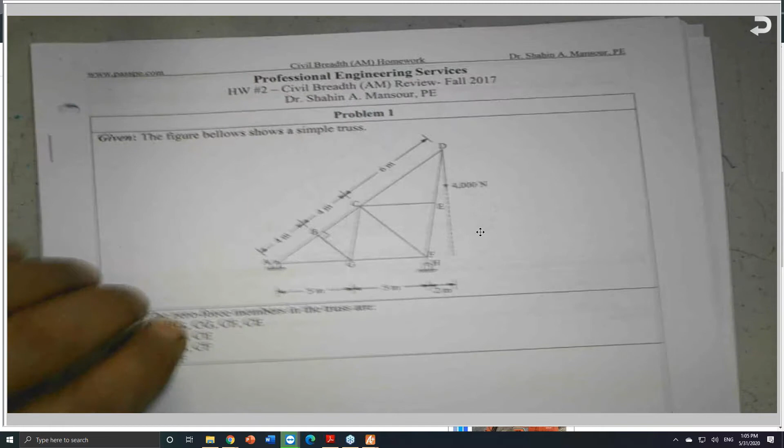So today I updated the schedule, because I found that the schedule available on our website is correct, except there is one day where I found a conflict. As I said, except yesterday - 5:30, I was supposed to be here yesterday between 4:30 and 7:30.

Please do your best to attend the sessions, and I will make it up. I remember I missed one session here, so I will make it up, and after that we'll go to transportation and construction until I resume the classes.

7-11. 7-11 is very important. By the way, this term 7-11 - like 7-11 stores and 7-11 in transportation - we have the phases, the sum of the phases is 7-11, and also chapter 7, table 11. This is in my Civil Breadth AM book.

It does have a very important table, which is chapter 7. Chapter 7, table 11. Here is chapter 6, chapter 7, materials, and there is a specific table here. By chance it came to be 711, so it's not intentionally designed to be that, but it came to be 711.

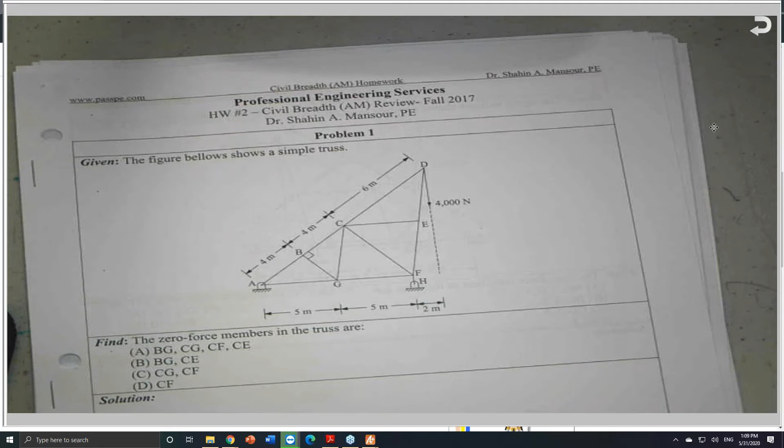So this is why I was not able to teach the whole day yesterday. I was teaching the surveying class for California, and I felt that the headache would not help me do a good job with you guys, so I moved it from yesterday to today. Thank you very much for coming, and thanks to all of you who emailed yesterday asking about my headache. The headache is gone, and I will do my best.

I will resume. Okay, I know there are many exams I sent before, and you are expecting some solutions from me. I will work on that and keep working on that, and do your best. Okay, so I sent the three exams this morning.

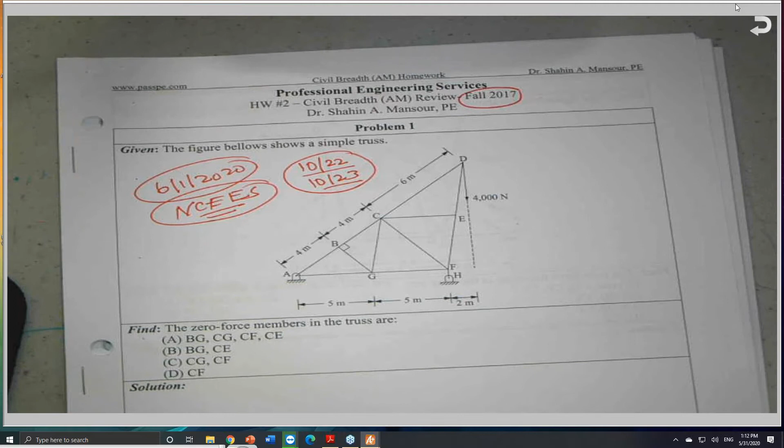So try to do your best and stay safe as much as you can, and I will do all my best to help you prepare for the October exam. I hope the October exam will be the last exam you will take.

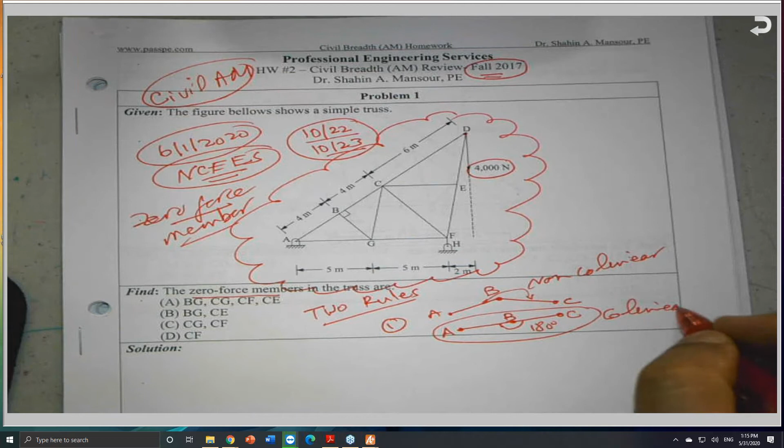Non-collinear means they have an angle—they don't have the same bearing or line of action. For example, if you look at these 2 members A, B, C, this angle is 180 degrees, so we call them collinear members. The rule says that if you have 2 non-collinear members and there is no support or load at the joint, these 2 members will be zero force members. This is rule number 1, as you recall.

Rule number 2 deals with 3 members, like AB, BC, and BD—3 members forming a joint, meeting at that joint, and 2 of them must be collinear.

Okay, and there is no load or support here. There is no load or any support like this or this. So this member must be 0. The third member must be 0. So these are the 2 real rules that we normally state in structural analysis.

Any structural analysis book you have, you will find these 2 rules. Some books say there are 3, but they came from here. So even some books I saw put it as 4 rules. But these are the 2 rules that if you remember them, you will be able to recognize that.

So if you look at this here, it is AB or BA and BG and BC. These are 3 members. This member and this member and this member, they are forming a joint. Here they make it 90 degrees. Here, not necessarily to be 90 degrees.

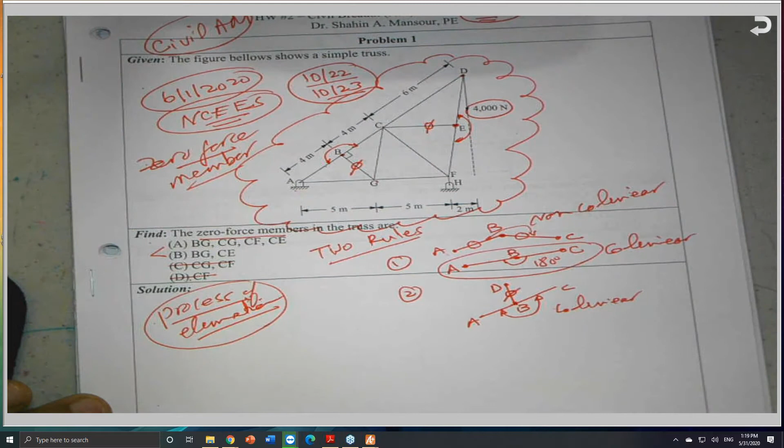is 0 also. Here you will find that CE is here and CE is here. So I'm still not okay. So probably this is not a good choice to start with E.

Right now, normally, okay, you are saying that this is BG and CE. So I will pick a member that is not here. And this is another way the process of elimination could be helped, since I eliminated 2 answers, and I said that CE is here and BG is here.

I look to CG or CF. Both are ones where you can make a determination of either A or B. So I will go to CG, and this is why I was very close to go to CG, but I jumped here just to tell you that moving here is not a good strategy. The good strategy is to identify a member that is not in the answer, so at least I can make the choice and go home happy.

So CG, since this member is a 0 force member, you can look at it more than one way. You can look at this joint G in more than one way. This member, if you take this joint, these 2 members, by the way, they are collinear. They are collinear.

This member is 0, meaning that as if it does not exist. I can look at this joint as 2 members are collinear, which is GF and GA, and this is the 3rd member, CG, forming the joint. So this is a 0. You can look at it that way.

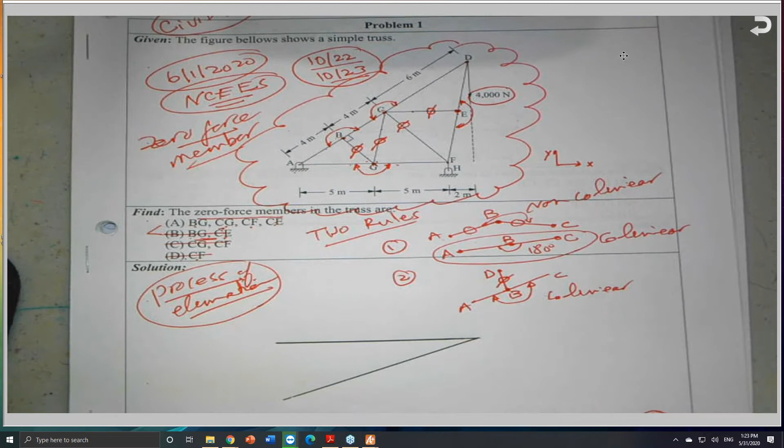Truss structures have certain assumptions, and we apply loads only at the joints, like this truss here, which I probably used before, to illustrate the concept of the zero force member. So if this is A, joint B, C, D, and E, let us assume for the sake of discussion we have one force here.

P is equal to 8 kips. Let us assume that this is 6 feet and this is 4 feet. And this is here. Let's assume this is also 4 feet.

Don't forget that all truss problems given to you should follow this rule: 2J equals M plus R. This is for statically determinate trusses, where J is the number of joints, for example 1, 2, 3, 4, 5. So 2J, 2 times 5, is equal to the number of members, 1, 2, 3, 4, 5, 6, 7.

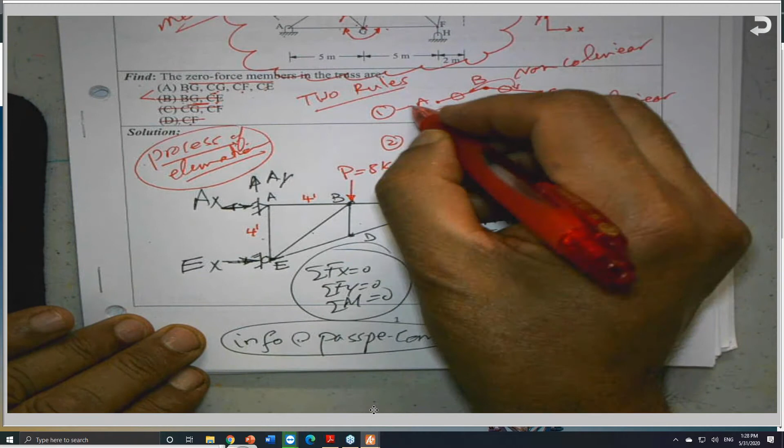The rule number 1, some of you are asking about rule number 1. Let me explain rule number 1, this is written in my book in chapter 4, the structural analysis book. It has these 2 rules, like any structural analysis textbook, the one I use for teaching for almost 30-something years. Chapter 4, structural mechanics, which is based on the NCEES to the best of my knowledge, has 2 rules for trusses. Here they are, or I call them 2 cases, by the way. I don't call them rules.

Let me get my camera as close as I can, at least so you can read, and let me adjust the focus. Here it is, let me read. I explain them using my Egyptian English. Okay, right now let us read the 2 cases or the 2 rules using American English.

If 2 non-collinear - and I apologize, collinear is double L, this is why I said this is missing an L, forgive me for spelling - if 2 non-collinear members form a truss joint and no external load or support reaction is applied to the joint, the members must be zero force members. This is the rule you will see in structural analysis books.

If we apply this rule right now to the truss I just drew, here it is. I just made one truss, A, B, C, D, E, and it has only 1 load. So this is the truss I just drew, here it is.

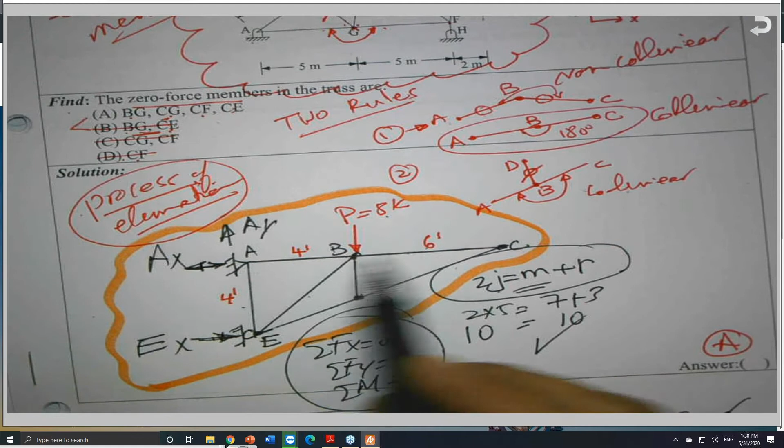Let me give you 22 seconds, because I think now you can tell me how many zero force members are in this truss, A, B, C, D, E, as you see it here, and it has only 1 load here, 8 kips. And this is 6 feet, this is 4 feet, and this is 4 feet. I will put 4 answers: A, none; answer B, and we can vote.

We are a democratic country, we're going to vote this November. Okay, it is 2 members for answer B. Answer C, 3 members. Answer D, 4 members. So either none, 2, 3, or 4. These are the 4 answers that I have.

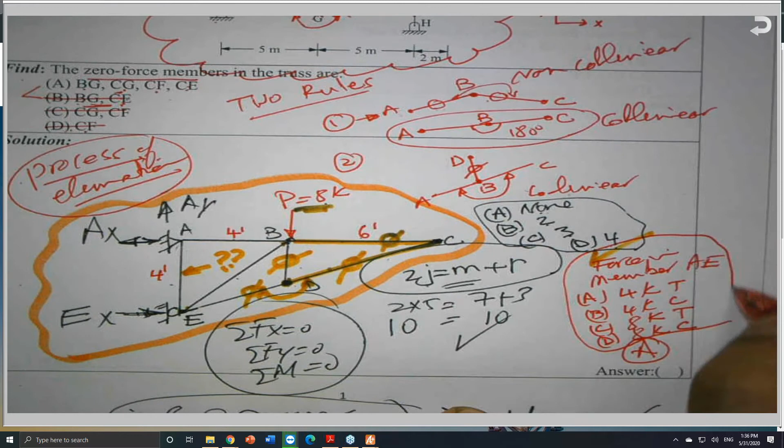So we have answer A and B and C and D. The answer A, 4 kips tension, 4 kips compression, 8 kips tension, and 8 kips compression. Okay, I'm talking about the member AE. Here it is, AE.

So this here, the answer is 4. Let me mark the number of zero force members. This is the number of zero force members.

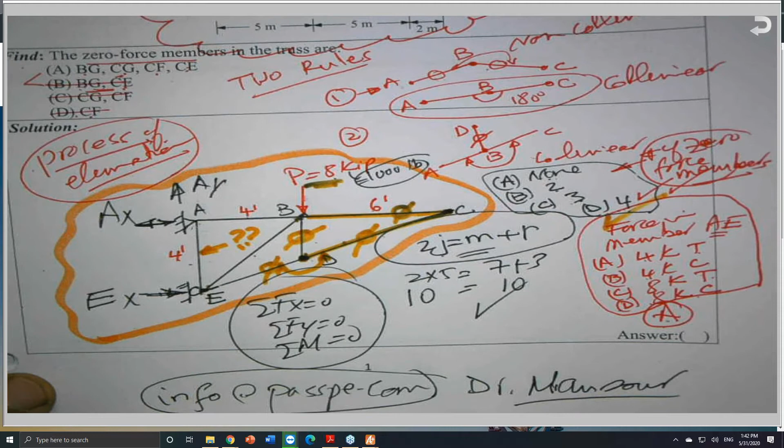Let us look at this - we have a force here. I will answer you, my friend, just give me a chance. Some of you raised a hand, but let me go to my drawing board and try to explain it a little bit more.

Because I needed to understand this very well. So this is the truss I just constructed - I don't make anything, I just construct something and make it a little bit to proportion, so at least you get a feeling of it.

So this is a roller support, and this is a hinge, as I draw it here. Be careful with the supports, because supports are very important. This is a roller support - it has only one reaction, perpendicular to the contact surface between the support and the surface. And I said that there is only one load acting here, which is called P, 8 kips. We named the joints A, B as in boy, C, D, and E. Is this correct? Yes. And this is 4 feet.

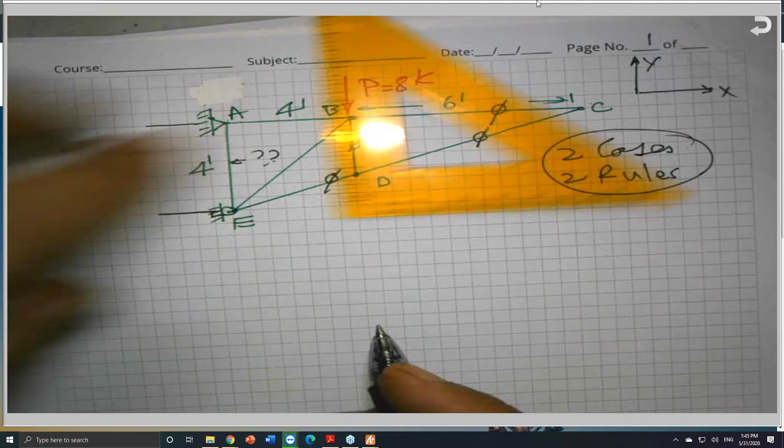So A sub Y, I put it to be up, or if you'd like to put it exactly here, I have no problem with that. Let me modify my location of this reaction, just at least it will make more sense to you. So if you put this here as an A sub Y, and as you can see here, I draw it up.

Why? Because we have 3 equations, the 3 equilibrium equations. Sigma force X equals 0, sigma force Y equals 0, and sigma moment equals 0. So I have one force, 8 kips coming down. I must have this 8 kips going up. Equilibrium. Otherwise, this truss will start to move around.

Have you ever seen a truss on the street? No. Trusses always are stable and in equilibrium, because action and reaction. So I know this from here by inspection, by applying the sigma force Y.

I have here 2 reactions in the X direction. One reaction is going to be this way, and the other reaction going to be this way. And these two reactions are equal magnitude, opposite direction. Because this force is pushing down, it tries to take this truss out. It will create a clockwise overturning moment. How much is this reaction, by the way?

A sub x. Can you tell me what is A sub x in 22 seconds, please? In fact, you will find that A sub x is also 8 kips.

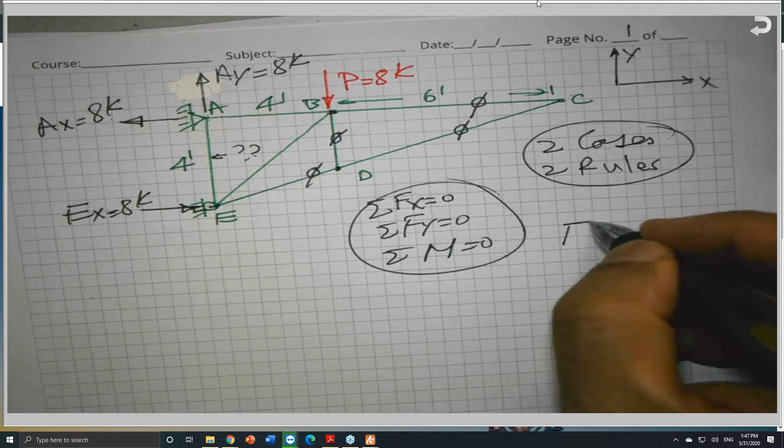So if the force right now in the member AE equals what? This is what I'm asking. This force in this member here, AE, how much? This force, by inspection, you don't need to do any analysis. But I will take the method of joints and apply this force here. It must be this way. The arrow going this way, and the arrow is going this way. And this force here, the force in the member AE, is equal 8 kips.

Tension or compression? So we have 3 scenarios for any force that exists on any truss member. Either a zero force member, and we show the member with 0 like this, or a member under tension, or a member under compression.

For tension and compression, there are 2 definitions. I prefer to stick with one. I can explain both of them, but I needed to remember only one. I prefer always with respect to joint. This is a joint, and this is a joint, and this is a joint. Any truss member is connecting 2 joints, or spans between 2 joints. You will never find a member just at a joint and hanging somewhere here. No, it has to continue all the way to the other end to form a joint, because these are the assumptions. All members are connected together with frictionless joints.

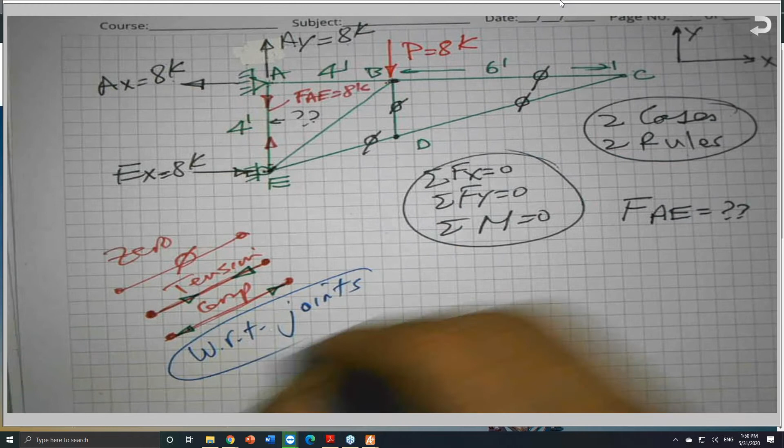If you like to remember the other, this is with respect to joints, and it is true with respect to members. But if you remember with respect to joints and apply it, if the force is pulling the joint, here is a joint and here is a joint. In our case, what is the arrow here? The arrow is pulling this joint A here. So the force in this member is 8 kips tension.

And this was the answer C. Not 4 kips compression. No, 8 kips tension. So this answer is the correct answer.

Okay. Similarly, what about the force in the member AB? I determined the direction of this. So I have a force going this way and a force going this way. So the force in this member also is 8 kips, and also it is a tension member.

The force in the member EB, the force in the member EB, I will wait for you. I need somebody to give me an answer.

So already you found the forces in this member and this member and this member, which is 0, and this, by inspection.

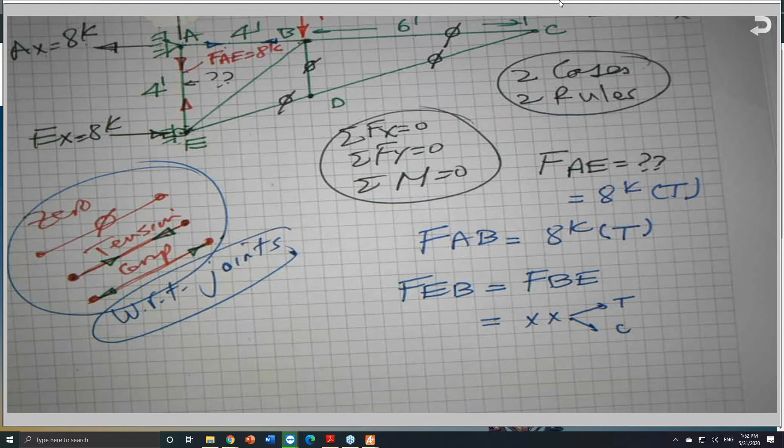Let me move my camera here, at least you can see the entire truss. I will give you 1 minute from now. I know you have 6 minutes on the exam, but we need to be ready and fast, because we need to get 100% of the exam to guarantee that we will pass.

So this is the second member I am shooting for. Okay, the 1 minute is over. So let me check to see if anybody of you can help me.

Okay, I got too many answers, too many different answers. Two of them so far are good or correct.

Okay, first of all, by inspection, I know this member is 0. The vertical member BD is 0. We got it from here.

So this member, the slanted member, it must have a component in the X direction and a component in the Y direction. So the component in the Y direction, it must balance this 8 kips.

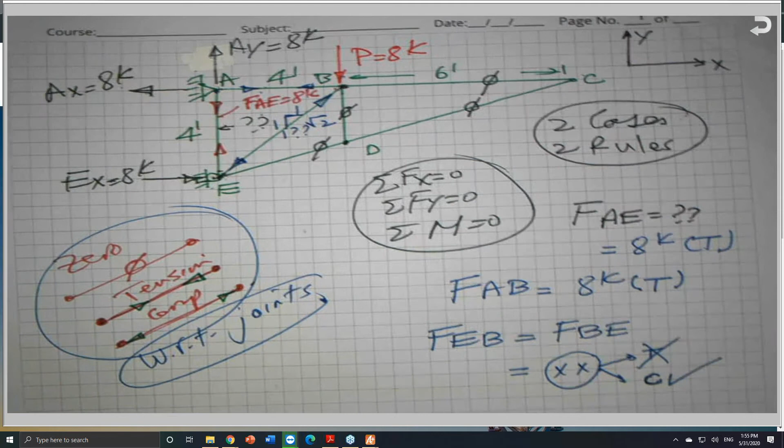So if I take this joint out, let me take a joint, because there are 2 methods, or you can make it 3. Method of analysis for trusses, method of analysis. Methods of analysis, essentially there are 2. Some books put it in 3.

Since I use many structure analysis books for my 30 years teaching as a professor here in CSU Fresno and in New Mexico State, in Las Cruces, New Mexico, each author or each professor presents the case, but some professors make a little bit of difference.

So method of joints and method of sections. And there is another method that came from them, it's called cut and sum method. But essentially it is a method of sections.

Method of joints, I need to remember: never pick a joint that has more than 2 unknowns, not 2 members, be careful. 2 unknowns.

Why am I saying that? I'm not inventing anything, by the way. All this knowledge is available in textbooks, I'm just presenting it now. Why I'm saying never pick a joint that has more than two unknowns, not two members, is because I have only two available equations: sigma force x equals 0 and sigma force y equals 0 for method of joints.

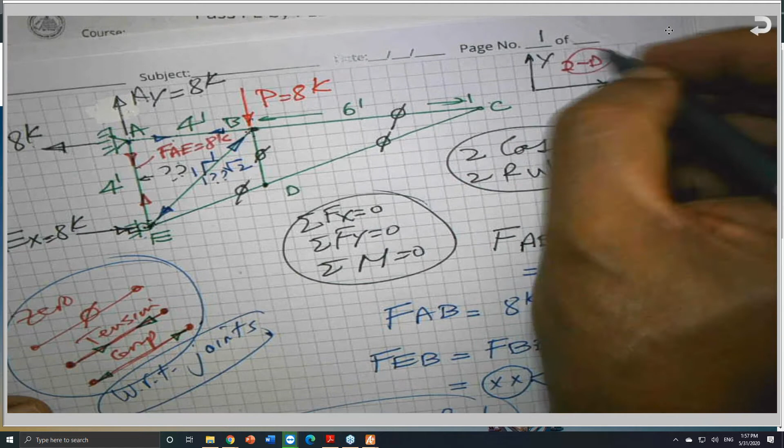What about the third one? Oh, I mentioned there are three equilibrium equations for a 2D system. This is a 2D system, by the way. Any 2D system that exists on Earth does have these three equations plus any conditional equations if there are any.

Because in method of joints, all the members are concurrent force members, they are meeting at a common point, so the moment equation has no value because there is no moment arm. But in method of sections, we have three equations: sigma force x equals 0, sigma force y equals 0, and sigma moment equals 0.

The moment equation does exist for the method of sections, and I will talk about method of sections shortly. The cut and sum method is exactly the same as the method of sections. You cut and sum the forces in the x direction, y direction, and even apply the moment.

So if you look to this joint B, if you take this joint out, what is the method of joint? Come here, Mr. Mansour, and you are going to cut this joint with a scissor. You take it out.

Isolate this joint. But am I violating the rule I just mentioned, never pick a joint that has more than two unknowns? No, I did not violate that because this is 0 and this is 0. Even before finding the force in member BA, I can still take the joint because already I have two members that are zeros, so I have only two unknowns. So if I take this joint out, I will take joint B.

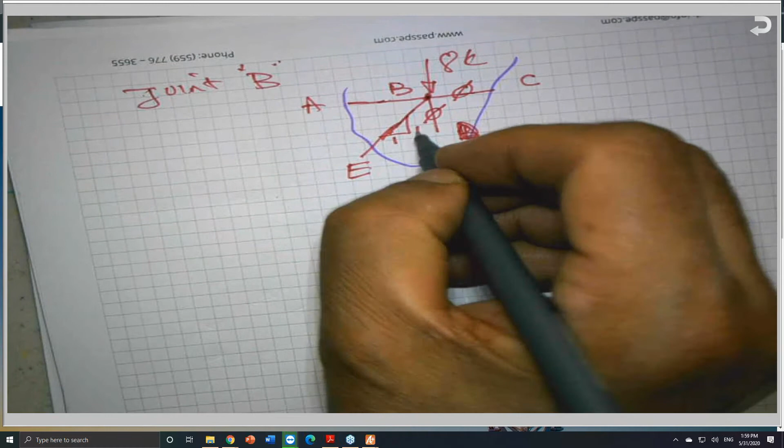Already I know that this is 0 and this is 0. And I know the slope of this is 1, 1, square root of 2. And I know for a fact this force must be going into the joint because the component in the y direction must balance the 8 kips, x and y. So in this case I can apply... Did I forget anything? When you pick a joint, you come with a cut, you cut the joint, imagine you come with a scissor and cut it and take it out as a free body diagram.

Right now, without knowing the force in member BA, which I already know from the other joint, I can say sum of forces in the y direction equals 0. And I have to state direction. I know the direction of the force, but assume for the sake of discussion I don't know if it's tension or compression.

Let me reverse it. By inspection, I know it's a compression force, but let me assume I don't know. When you have too many members, sometimes we don't know. Let's assume I assumed it to be this way. What is this? This is tension. I assume it to be tension. It is pulling the joint, pulling. This is the tension member.

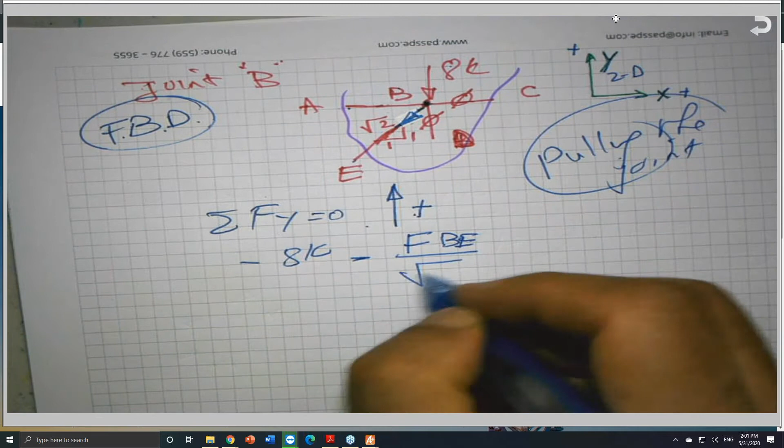So I will say minus 8 kips coming down, because I assumed anything goes up. And this here has a component in the y-axis: set minus the force in BE divided by the hypotenuse, which is the square root of 2, multiplied by the vertical component 1, equals 0. I will solve for the force in member BE. You will find that this equals minus 8 kips times the square root of 2.

And this will give me the answer that was given by one of you. So 2 square root and 8 times, it is 11.31, negative 11.31 kips. What does this negative mean? Negative means that my assumption is wrong. Okay, this is a very easy one.

I can, by inspection, say that this should be compression. So if I put it in the proper direction, which is a compression force, and if I apply this equation, the component is going up in the same direction, so this becomes positive, and automatically it becomes positive. That means my assumption is correct.

But as I told you, if you don't know the direction, either for a reaction or for a force in a member, assume it to be tension or compression, or assume it to be right or left. For example, here, these two reactions, I know that by sum of moments here, so this is clockwise, this must be counterclockwise. By inspection or by practicing, you will be able to find all these things.

A problem like this, problem number 11, of the same exam. A 1/2 inch 7-wire pre-stressing strand is to be stressed in the pre-tensioning bed, showing 14 tons jacking force. The length is given to be 310, and it's asking for the strand properties indicated. What is the elongation?

As you know, concrete, which I will also talk about, how to mix concrete and adjust for mixing properties of concrete - all these things are very important. This is the material section. Concrete will have different ways to classify it. Concrete is a mixture of 4 components. First of all, fine aggregate, which is sand.

Any concrete that exists on earth has these 4 basic ingredients, and after that it has some additional ones. Coarse aggregate, which is gravel, plus cement - and we have 5 types of cement, you should know what type. And finally, water. Those are the 4 basic ingredients for any concrete on earth.

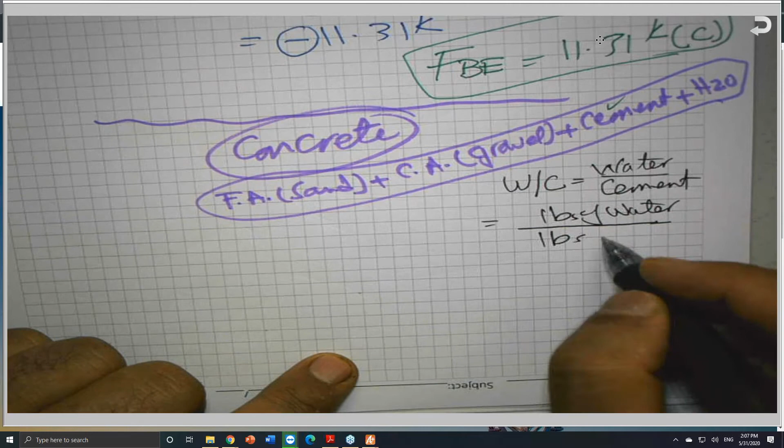What does it mean? It means how many pounds of water over how many pounds of cement. Or sometimes we express the water cement ratio by how many gallons of water per sack of cement.

We know a sack of cement is 94 pounds. It's not 100 pounds - they made it 94 because this is the volume of 1 cubic foot. So a sack of cement is 94 pounds. And a gallon of water is 8.34 pounds.

So this, and I have many problems related to this topic, because it sometimes comes in the morning, sometimes in the afternoon exam, especially for the construction group, or transportation also. And we should know how to adjust for surface water and so on. We'll talk about this later on.

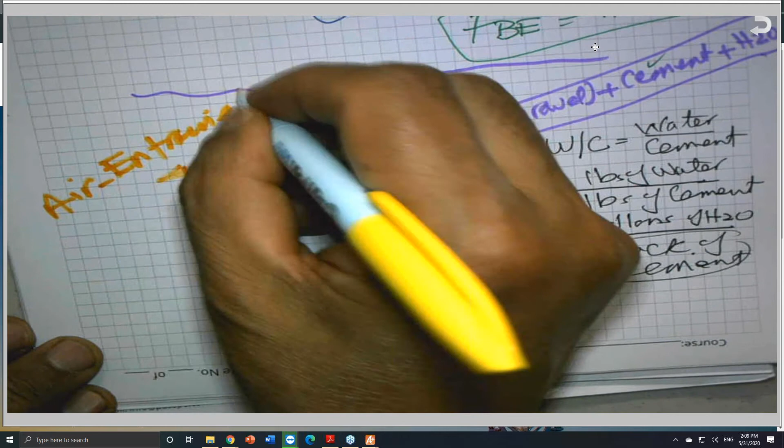So for concrete, we can classify concrete in more than one way. We can say this material could be either air entrained concrete or non-air entrained.

This air entrained concrete is the type of concrete where we intentionally create air bubbles into it using something called admixtures - I will talk about it later on. But non-air entrained concrete has some air called entrapped air, not entrained.

And there is a very important relationship. Any civil engineer, even while he is dying, should remember that. Forgive me for saying that, but if any civil engineer is asked about this, and even while dying he didn't answer, don't put him in the grave - just take him back, I'll tell him to wake up. Okay, no problem, I know you remember it.

But this curve or relationship is between the water cement ratio and strength - I'm talking about the compressive strength. So this is the water cement ratio, and this is F sub C prime, which is P over A, the 28-day compressive strength. I will talk about why 28 days later on.

So there are two graphs or two curves, one for air entrained and one for non-air entrained. Here is one, and here is another one.

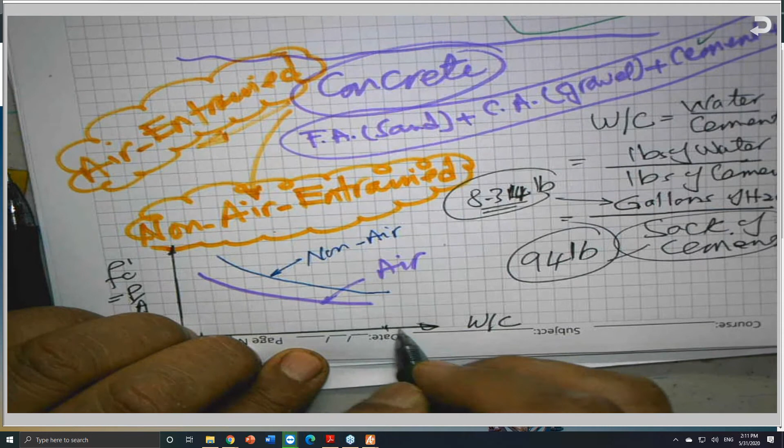For any given water cement ratio, the water cement ratio can go as low as 0.23 or 0.24, and it goes as high as 0.7. As the water cement ratio increases, what does it mean? It means the amount of water is more compared to a lower water cement ratio. You are putting a lot of water, so the higher the water cement ratio, the lower the strength.

So for any given water cement ratio, if you go up vertically like this, say 0.4 or 0.5, whatever the ratio is, if you draw a vertical line, you will find for the non-air case the strength is higher compared to air. So if you compare these two values, the strength here, this will intercept here and this will intercept here. So non-air will give you a higher strength because the strength is increasing this way.

So we are adding air intentionally for the air entrained concrete to increase what is known as durability, and we'll see what durability is later on. So we are creating air bubbles intentionally into the mix. We call it air entrained concrete. I know I'm losing strength for any given water cement ratio. These small microscopic air bubbles are between 0.1 and 1 millimeter. I am losing strength, but I'm gaining something called durability.

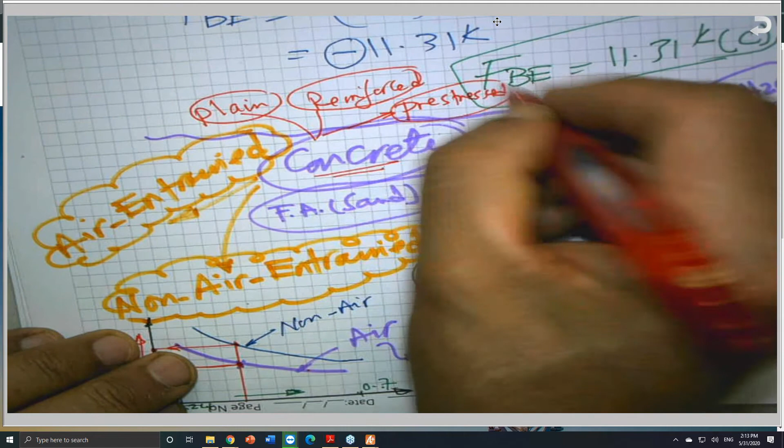There is another way to classify concrete. It could be either plain concrete, which is unreinforced, or it could be reinforced, or it could be pre-stressed. This is another way to classify concrete. It could be either plain concrete without any reinforcement, or it could be reinforced with rebars, like this rebar here.

Different sizes of bars, reinforcing rebars, this number 11 for example. And the other one is pre-stressed. A pre-stressed, we are using this. Probably some of you dealt with this. It's called pre-stressed cables, or strands, 7 wires wrapped together like this, and we pull them. I'm going to talk about what's called the pre-stressed strands or tendons. So this is another way to classify concrete.

Concrete also could be classified as normal weight concrete or lightweight. So normal weight and lightweight. Each group can be taken separately, and we can talk about it, and this probably will be covered during more discussion, but let me talk about pre-stressing, which is related to this problem here.

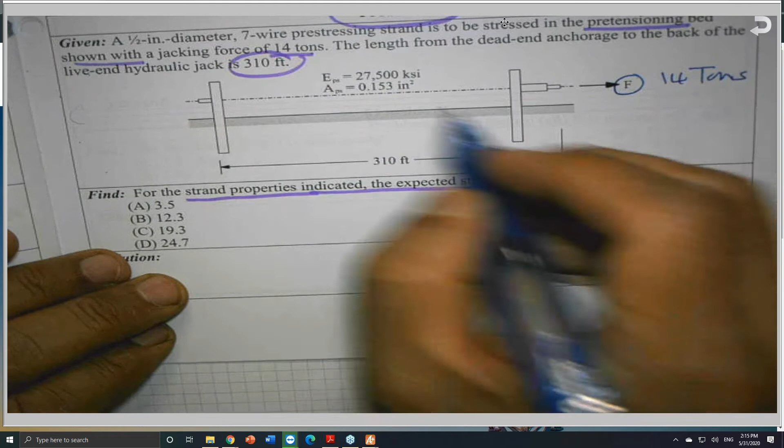Problem number 11: you have a force applied of 14 tons, and we're applying this modulus of elasticity, E, and this is the cross-sectional area, and the length is 310. He is asking if we apply 14 tons to these 7 wire strands, half an inch diameter, the one I showed to you. If you calculate the area for half an inch, it's equal to d squared, 0.5 squared, times pi over 4.

You'll find this is 0.1963 inches squared. If you calculate the area for a solid bar that is half an inch diameter, you can try this on your calculator, please do it, and you'll find this number, if I remember correctly. Let me do it. Yeah, it is 0.5 squared times pi over 4, divided... yeah, 0.1963. Yeah.

This is the cross-section area if you have a half an inch, and he said half an inch. But these 7 wire strands, they are not solid, by the way. In fact, we can take them out. We can disassemble them. These 7 wires, I don't know if you did this or not, there are 7. I can assemble them. Let me take them out.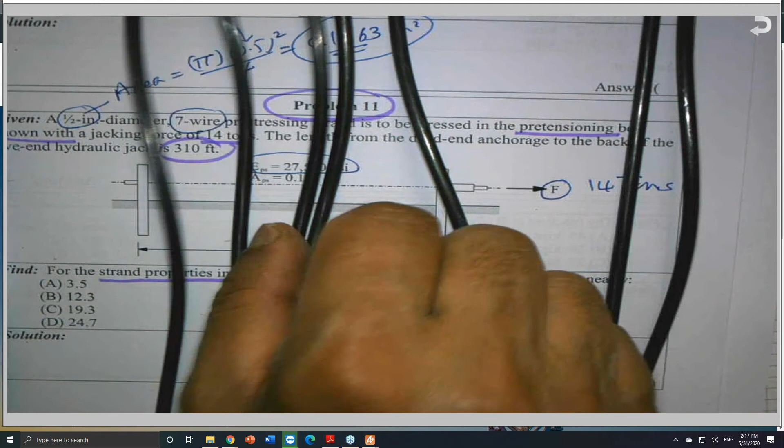Here it is. I used to give this to the students, and I tell them that if you can put it back together again in 22 seconds, I will give you extra 1 point in your final grade. Okay, just here it is. 7 wires, they are rounded together, or assembled together. Here we go: 7, 1, 2, 3, 4, 5, 6, 7. Okay, so they are forming this.

Let me put it back again. So we start with the straight one. There are 6 of them curved and 1 straight. So I will start with the straight member, which is member 0.

After that, I will start to wrap one over the other, and you can do this very quickly. So the 7 wires wrap around, the 6 wires are wrapped along the solid straight one in the middle, but there are some gaps between them.

This is why the area is not 0.1963. I still have one to go. Do you count how many seconds did I take? You are faster than me, obviously, because you are younger than me.

So this is the 7 strand. Why is the area smaller? Here the area is 0.153 versus if it's a solid bar. But there are some air bubbles here since they are wrapped against each other, so the effective area is 0.153, just to be aware of that.

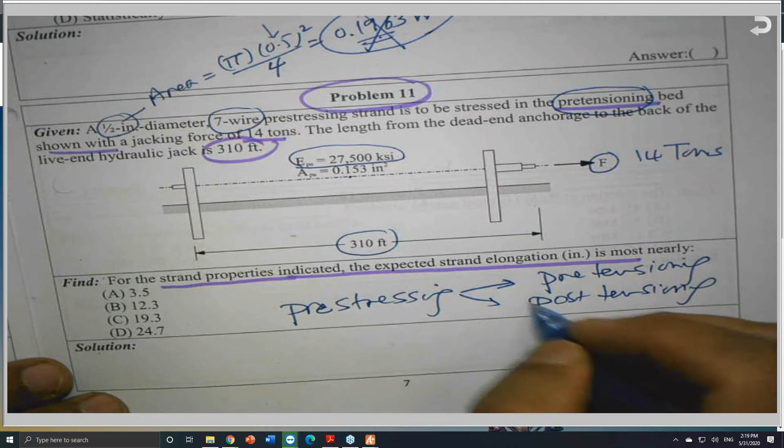There are 2 systems, each one has advantages. I discussed this in depth with the construction group. So this is an AM problem from my point of view. It could be an AM problem.

So he's asking how much the elongation is. All bodies are deformable bodies. So when you have any member or any body, and you apply a force, either tension or compression, it will deform.

We remember the letter E. E is the modulus of elasticity, and E is the slope of the linear portion of the stress-strain curve. Any civil engineer should remember this. This is the stress-strain curve, epsilon and sigma. Let me draw the entire stress-strain curve, but the linear portion's slope is sigma over epsilon. We call it Hooke's law.

Please remember this: E equals sigma over epsilon. Sigma equals P over A, force per unit area. And epsilon is the strain, delta L over L. Here I can solve for delta L, or sometimes we write it as delta, or even some books call it delta L. It equals PL over AE. This is the equation I need you to remember. It came from Hooke's law.

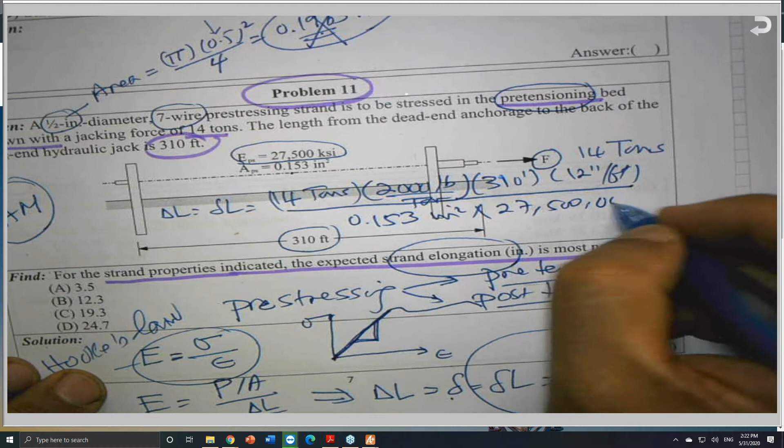A, the cross-section area, is given as 0.153 inches square, times E, which is given to be 27,500 KSI, or 27.5 million. So this is in pounds, 27,500 times 1,000 will give me PSI, pounds per square inch.

If you do this simple calculation, do it with me please. So it is 14 times 2,000 times 310 times 12, divided by 0.153, divided by the modulus of elasticity 27,500. Did I miss anything or put anything wrong? Bingo, I got 24.76 inches, which is very close to answer D, as in David or doctor.

So the point here, I would like to make two things. Number one, I needed to remember this equation, Hooke's law, this is called the modulus of elasticity E. I know we are using the letters a lot, modulus of elasticity. Normally we take the modulus of elasticity for steel around 29 million psi or 30 million psi.

Here he gave you 27,500 KSI or 27,500,000 psi. No problem, whatever number is given to you. If it's not given, normally we take E steel by default equal to 29 million psi, or 29,000 KSI. Or, if you are using metric, 200 GPa, gigapascal. We need to be familiar with all these units. Units are very, very important.

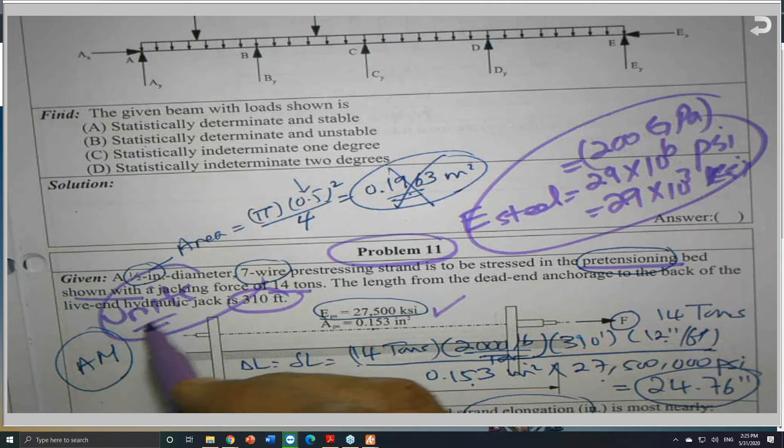NASA is a great organization. Today SpaceX with NASA, Elon Musk, their capsule already landed at the space station. This is the first flight from the US in about 10 years, so it was a great success. I watch NASA channel a lot. NASA is a great organization, don't misunderstand me. They just achieved something very good today with these two astronauts landing, or the capsule reaching the space station. This was 1 hour before they landed when I left, so I hope everything landed peacefully. But at one point, NASA lost a rocket, or testing they were doing for a rocket, and they lost it because of units.

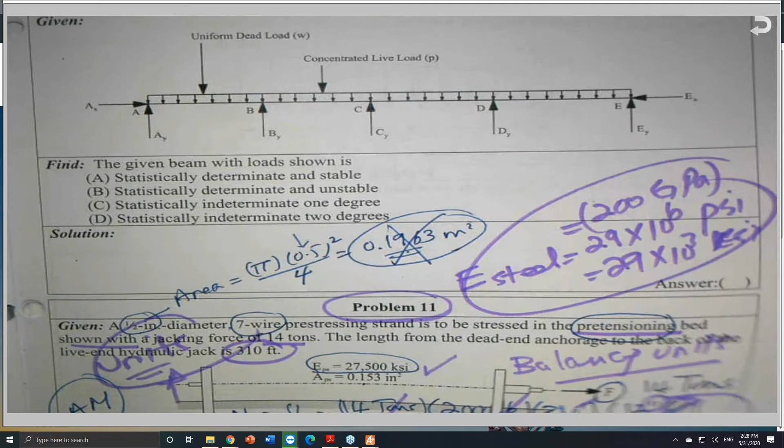So the answer is D for this one, and I will scan this in color, I will send it to you in color. Let me see if there is anything else I can pick here if you look at this problem.

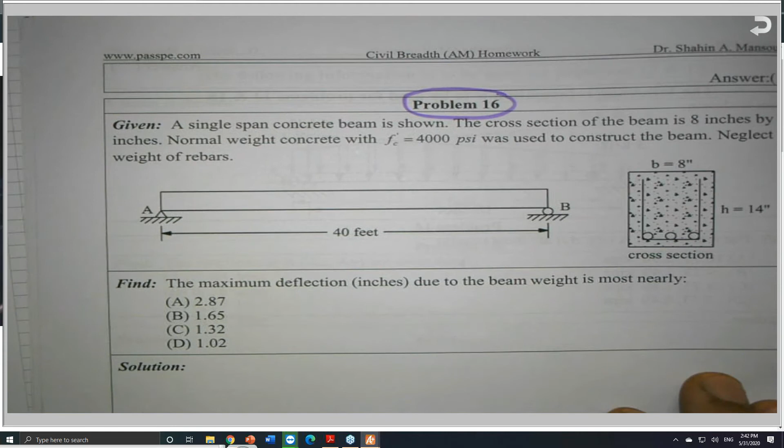Problem number 16. Deflection calculations are important, and nobody will ask you to remember the equations, and nobody will ask you or expect that you will develop equations. But we should be able to locate or identify the proper equations for deflection.

As you know, deflection - since all bodies are deformable bodies, any member, either concrete or steel or wood, will deform under the effect of the loads. So if you have a cantilever beam like this, a beam that's fixed from one end and free from the other end, we call it a cantilever beam. This cantilever beam, whatever the material is, if it's subjected to a load, either a concentrated load or a distributed load or both, will deflect.

Like for example, if you have a load P at the free end, and this is L, and the cross section of the member is given as B and H, whatever the material is. So I'm expecting that this member, under the load at the free end, is going to come down like this. It's going to deflect like this.

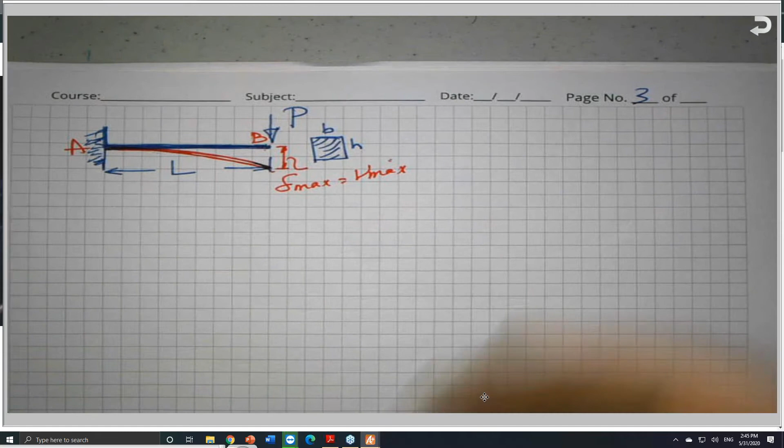As you can see, this deflection or vertical deformation - like this straight edge, I have a straight edge, and if I hold it from one end and push it from the other end, as you can see, it goes down. Here it is, it will show you the deflected shape. So this deflection - I needed to understand the concept, because they ask some conceptual questions and calculations.

Concept: if this beam, let's assume for the sake of discussion, is made of steel, and one time we use steel that has F sub y of 36 KSI, and I change the steel to make it F sub y 50 KSI. One time this beam is made of steel that has a yield stress of 36 KSI, and another that has 50 KSI. Do you expect the deflection will increase or decrease?

So it shows changing F sub y from 36 to 50, the deflection will: answer A, increase, but B, decrease, C, no change, or D, not sufficient information.

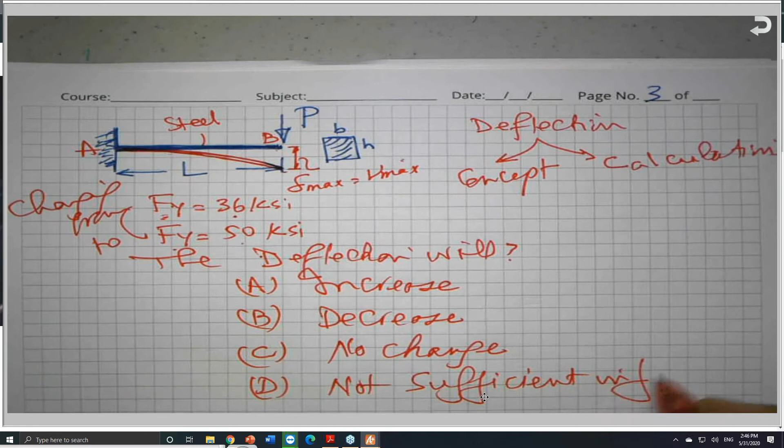And let me repeat the question again. A cantilever beam as shown, where the area is given, and L is given, and the load is given. The only change I'm going to make is changing the F sub y, the yield stress, because as you know, the yield stress is given in the steel manual. You remember the steel manual, the black or the red or the green, whatever it is. In chapter 2, you'll find that there are some tables, and it does have these values. Let me see if I can locate them quickly.

Okay, here it is, F sub y and F sub u. F sub y, the yield stress. Okay, and this is 36, for example. And some steel, they have the 50, here it is. So I change F sub y from 36 to 50. This is the steel manual, the 14th edition. They have the 15th edition right now. It's not required for the AM, required for the PM, for the construction and structure group. But anyhow, the point is, changing the yield stress from 36 to 50 KSI.

This is the only thing I change. The deflection will increase, or it will decrease, or it will have no effect at all or no change, or I did not provide you with enough information to give a correct answer. What do you think? A or B or C or D?

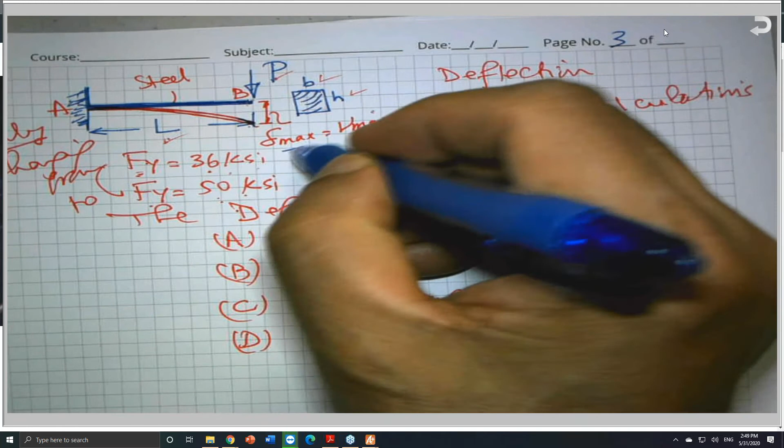If we know the relationship between the deflection, delta, either the delta max or the general equation, and the parameters that will affect the deflection, I will be able to answer it. And this is in the steel manual. I'll show you the cases, which I put in my textbooks in an arranged way. So this delta max, the maximum deflection, which is also applicable to the general equation, or V max, as some are using, is equal to, for this specific case, PL cubed over 3EI.

This is the equation. If you have a concentrated load acting at the free end, it is PL cubed over 3EI. We derived this equation in school, if you remember, double integration and moment area method and all these things. But in the steel manual, they have it under the section of beams. At the end of the section of beams, you'll find that we have a lot of cases, with the deflection, shear, moment, and all these things. So you will find the cantilever one. Let me show it to you. But as I told you, I put it in my books in a different order, to make it easy for everybody.

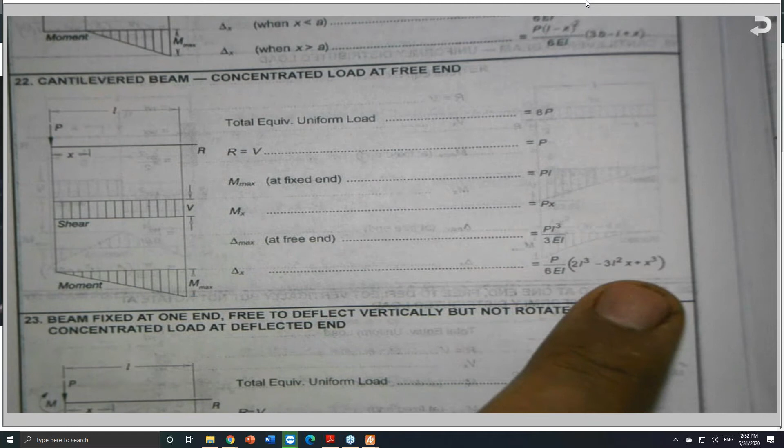This is case number 22 in the current edition, or the 14th. Here it is. It is a cantilever fixed at one end, and sorry, the text is so light, but let me zoom in so you can see it. And this is the equation I just wrote: PL cubed over 3EI, the delta max at the free end. This is the general equation, delta at any x, which is also a function of P, EI, L, and x. So F sub y, the one I was talking about, is not a parameter of this equation. So it doesn't matter if you change the steel yield stress from 36 to 50, no change.

The deflection will change only if P changes, L changes, E, or I. I is the moment of inertia, which depends on the cross-section area, which is BH cubed over 12. For this rectangular section here is BH cubed over 12, as you remember.

E is the modulus of elasticity. And the product EI is very important, by the way, because they might ask you about EI. It does have a name. Do you remember the name? It's called flexural rigidity.

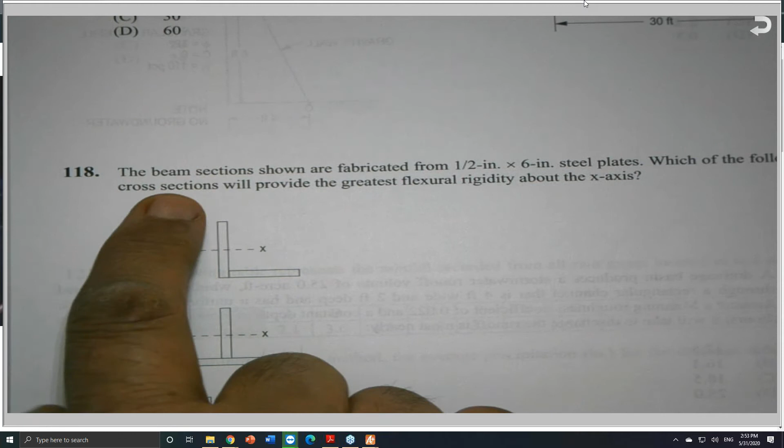Because if you go to the NCEES blue books, the practice exams, they might come up with a new set in July. I hear there is one question in the AM section, question number 118. They say the beam sections shown are fabricated from 1/2 inch by 6-inch steel plates. Which of the following cross sections will provide the greatest flexure rigidity? This term is very important: flexure rigidity.

Flexure rigidity, this is the EI. If I don't know what the flexure rigidity is, I will have difficulty answering this question, because we need to know which section has the highest value. This is the L shape, or the angle as we call it, the inverted T, the I-beam upside down, and the I-beam or the W shape in the regular orientation.

E is the modulus of elasticity, and since these are steel plates, any steel plate has one value, which is 29 million psi, as I wrote it shortly. Or if you like to remember, 30 million psi, I have no problem with that. Or 30,000 ksi, kips per square inch, or 200 gigapascal. The steel manual is using 29 million - the one I showed you. Any edition, the green or the blue or the red or the black, it does.

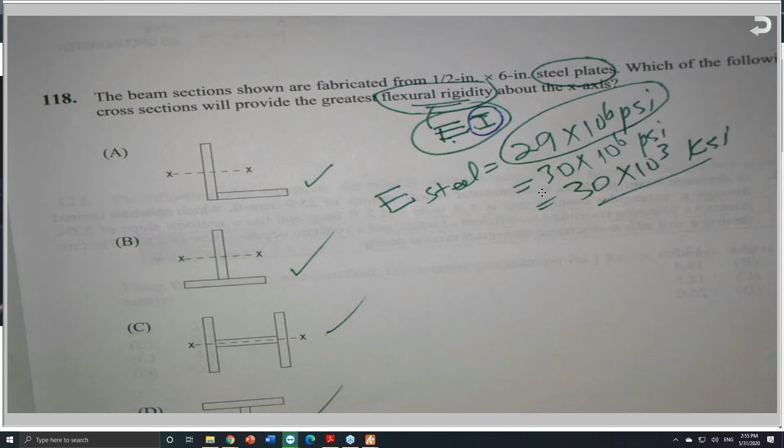So E is constant for all of them. So the only variable left for me is I. I is the moment of inertia, or the second moment of area. We call it moment of inertia, as you know.

It seems to me somebody's trying to use my computer. Yeah, probably one of my assistants is trying to get access to the computer from home. Hopefully he will recognize that I have a class, because he doesn't know that the class has changed from yesterday to today - I didn't tell him. I got really busy. If he tries again, let me text him very quick, at least he will not try one more time. At least, yeah, it's my fault - I didn't tell him that I moved the class.

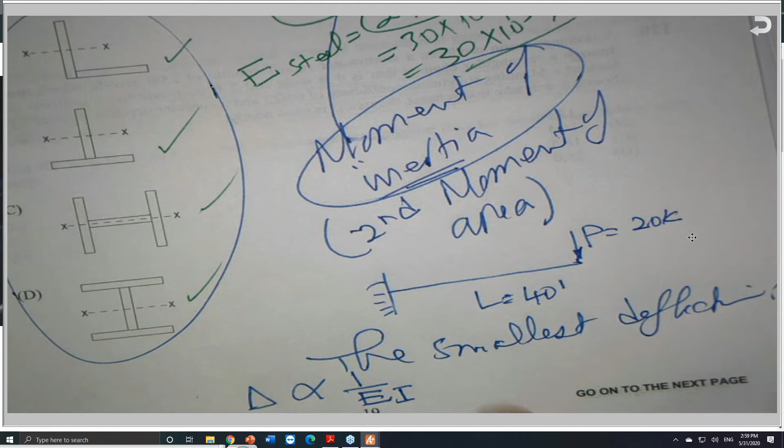This beam is subjected to a concentrated load at the free end of 20 kips. Which one will give you the greatest deflection? Or which one will give you the smallest deflection? I know the deflection delta is inversely proportional to 1 over EI. I need you to know that, because here it is: this equation, delta equals PL cubed over 3EI.

The problem that I will go over does have a distributed load - problem number 16. This is a simply supported beam, and here is the cross section: a single span concrete beam, the cross section is given, 8 by 14. Normal weight concrete, F sub C prime is given as 4,000 psi was used to construct the beam. Neglect the weight of the rebars - they have some rebars here. What is the maximum deflection due to the beam weight? This beam is going to deflect under its own weight. Is this correct? Yes.

It will deflect. How much is the maximum delta max? The length, or the span, is given. So delta max for this scenario is equal to 5WL to the fourth divided by 384 EI.

Another equation: if the load is a distributed load W, it is 5WL to the 4 divided by 384 EI. Let me double check, because sometimes I forget these equations as I'm getting older, but it will not hurt. This is a simply supported beam carrying a uniformly distributed load, and here it is: 5WL to the 4 divided by 384 EI.

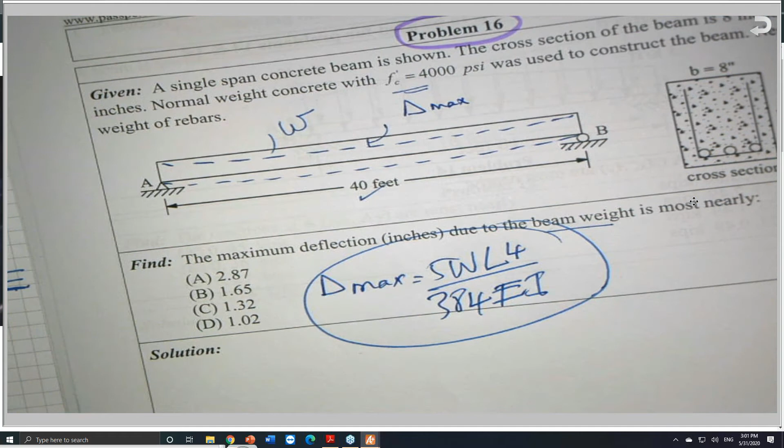All this is given, I give it in my book in a form of tables, but I put them in a form of cases, grouped together: statically determinate, statically indeterminate. That will be much easier during the exam, because the cases in the steel manual are not arranged in an easy way. This is a way that I believe could be much easier for you, but you are very welcome to use whatever book or books.

So again, delta is inversely proportional to 1 over EI, meaning that the larger the flexural rigidity, the smaller the deflection. I need you to know that. So instead of asking in the blue book, the NCEES book, which one has the greatest EI or the flexural rigidity, they didn't define the flexural rigidity for you. They assume that you know it.

They'll give you different sections and say the following four sections were used as a cross section for a simply supported beam or a cantilever beam carrying a uniform load, and the length is so and so. Which one has the smallest deflection? The beam that has the largest EI has the smallest deflection — as this goes up, this goes down. They are inversely proportional, do you see that?

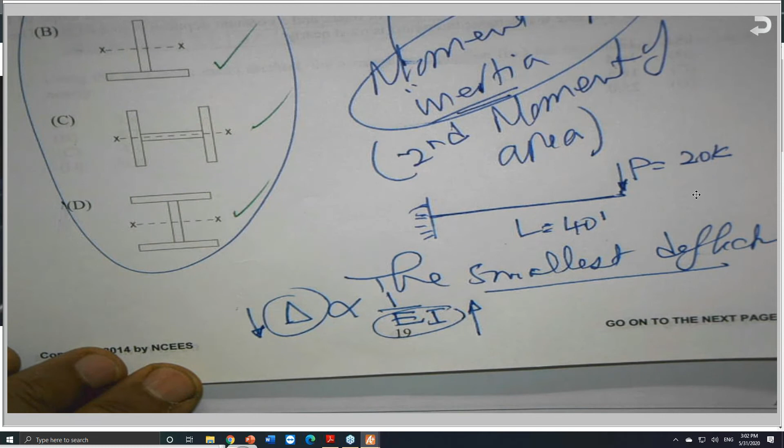So the same question could be asked from a different angle. Not necessarily will they ask you this question in the same format as given in the practice exams. As you all know, those problems are so easy compared to the actual exam — the actual exam problems are difficult. This is why I always shoot for the moon, and if you miss, you are going to land among the stars.

So the first thing you might be given is a problem asking you to calculate the deflection, and this is what we are looking for. Or they might give you the same scenario but ask a conceptual question: where is the maximum deflection? What will happen if we change this concrete — instead of f sub c prime of 4,000, make f sub c prime 5,000 PSI?

What do you think happens if I change f sub c prime? As you know, f sub c prime is the 28-day compressive strength. When we prepare these cylinders, the 6 by 12 — do you remember these cylinders at school? The 6 inches in diameter and 12 inches in height — we cap it with sulfur and crush it with load P.

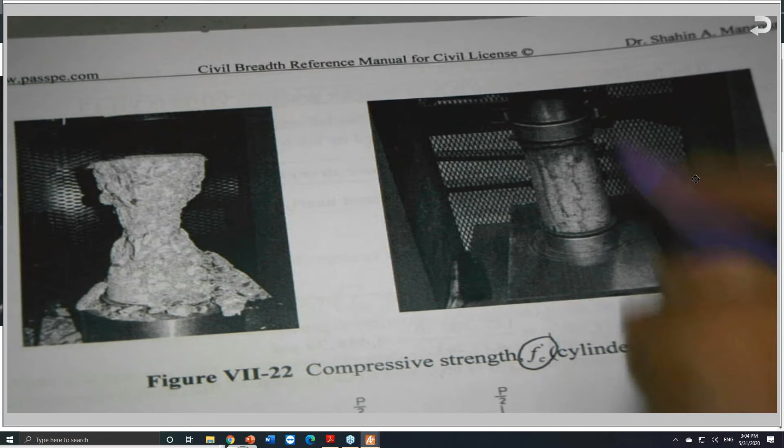So this is a concrete cylinder, this is a sulfur compound, and this is the upper head and lower head of the testing machine. We crush it — this is 6 by 12, 4 by 8 is also used to get f sub c prime, which is basically P over A, this axial load, the maximum load. This is after failure, forming this shape — it's a pyramid shape like this, by the way.

And there is a reason for that we can discuss. So this is the cylinder test. There is another test, called the beam test, which is to get the modulus of rupture, MOR. And the third test is the splitting tensile strength, or the Brazilian test. You might be asked about this setup, and this is after failure, how it looks like.

So the question is, when we are determining or calculating the maximum deflection, I will need to get the proper equation, number one. This is the equation as I wrote it down, and I double checked it with the steel manual. I need to get the parameters.

5 is a constant, came from the integration and all these fancy equations. W, what is W? W is the unit weight per linear foot.

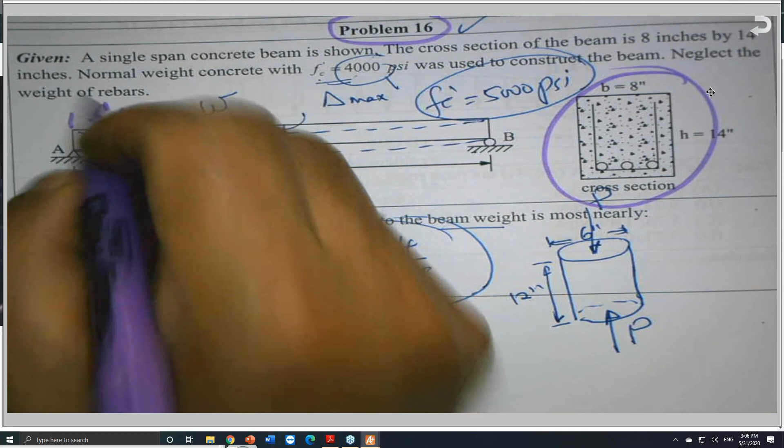Here he did not give it to me directly. He asked you to calculate the unit weight. So I will take 1 foot, and I say W is equal to what? It is 8 inches, so 8 inches divided by 12 inches per foot. And 14 inches is the depth, so 14 inches divided by 12 inches per foot. Units are very important, and I will take 1 foot length.

So this will give you cubic feet. And I know this is concrete.

He said normal weight concrete. Do you remember the concrete classification I talked about? We have lightweight, this classification, and the other one normal weight. Normal weight, gamma for normal weight is between 145 to 150 pounds per cubic foot. You can choose any number in between. Normally we go with 150. If you like to use 145, I have no problem with that. The answers are widespread, so I will say this is 150 pounds per cubic foot.

You remember this 1 foot, I took 1 foot length. So what is happening? Inches will cancel with inch, inch will cancel inch, this is cubic feet. And this is per foot, and foot. So if you cancel, this will give you how many pounds?

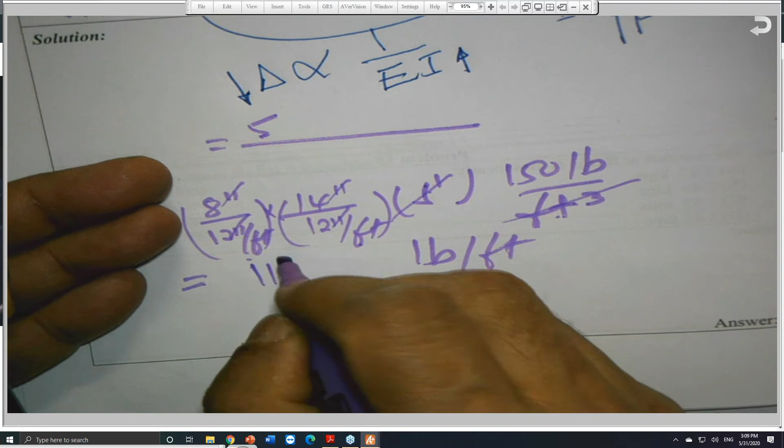So let me do it one more time. Normally I do my calculation twice, just in case I made a mistake or something like that. So it is 116.67 pounds per linear foot, if my math is correct.

This is W, which is required. L is given as 40 feet. So I will say this is 5 times 116.67 pounds per linear foot, times L to the fourth power. Be careful, it is 40 feet and this to the fourth power. When you do this, it will give you feet to the fourth power. But I have a foot here, so it will cancel, and this will end with cubic feet.

I need to convert the cubic feet into inches, so we multiply it by 1728, this is inch cubed per cubic foot. So this is feet, and this is feet to the fourth, and this feet cubed. So they will cancel.

Divided by 384, this is another constant of the integration. E and I, EI as a product, we call it flexure rigidity.

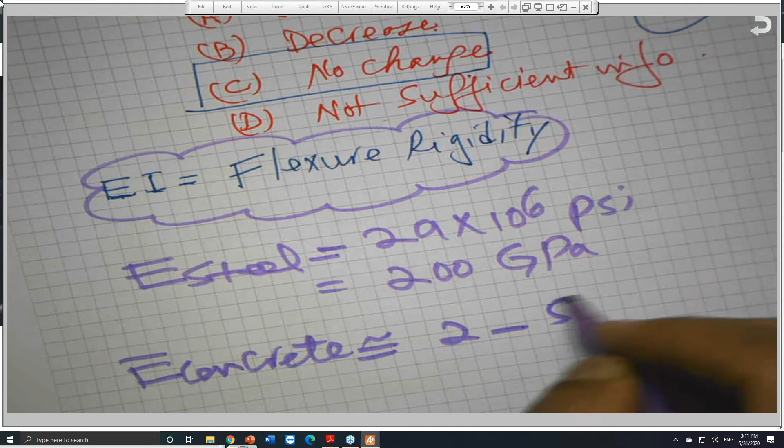But the E for concrete is not given. E concrete is not given. Do you remember E steel? I told you any civil engineer should remember the modulus of elasticity for steel, which is E steel is 29 million psi, or 200 gigapascal. For E concrete, it is not constant, by the way. E concrete is about between 2 to 5 million psi, a range, because the concrete's modulus of elasticity E is a function of F sub C prime.

And there is one equation you will find in my book or my books. It is given like this: 33 W to the 1.5 power, square root of F sub C prime. This is the ACI empirical formula, American Concrete Institute. They came up with this equation, and we are using this equation. Or for normal weight concrete, we use this number, 57,000 square root of F sub C prime. W is the unit weight of concrete, which is 145 to 150. So here, if I plug this in, it is 57,000, and he gave me F sub C prime, the 28-day compressive strength, which is 4,000. I plug it in here, 4,000. And this is an empirical formula, by the way, empirical formula.

Empirical formula, developed by ACI through extensive testing. Note that units don't work here in the conventional sense, because this is pound per cubic foot and this is PSI. So when you take the PSI value and take the square root, what does that give you? It won't give you something that makes clean unit sense, but this is the way the equation was developed for us.

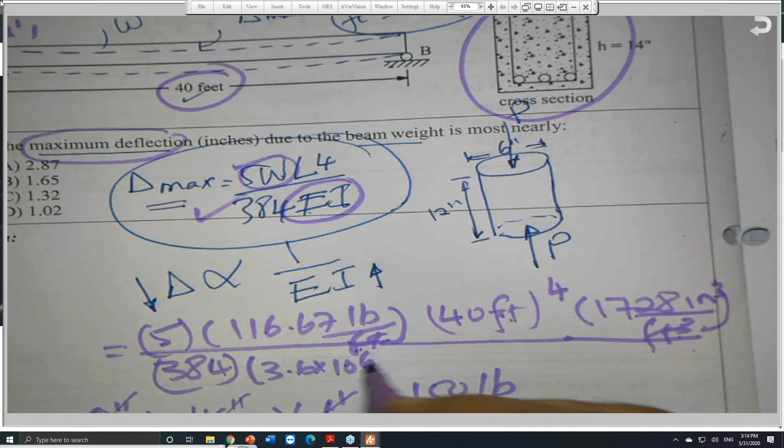So in this case, I got another piece of information: the modulus of elasticity E is 3.6 million PSI.

The last item is I. Since this is a rectangular beam with B and H, I equals BH cubed over 12. So I is 8 times 14 cubed divided by 12.

Let's do this calculation together. When you get my notes, let's see what number you get. Please review it, and if you find a typo or an error, let me know and I'll correct it next time we meet. Let's do it quickly to see if we get one of these answers. The deflection must be in inches.

I convert everything to inches and pounds. So it's 5, enter, 116.67 times, and 40, enter, and 4 to the times, and 1728 times, and 384 divided, and the 3.6 divided, and 10 to the power 6. Probably you are faster than me at this - that's good, since you're younger. You're supposed to be faster. This is the new generation.

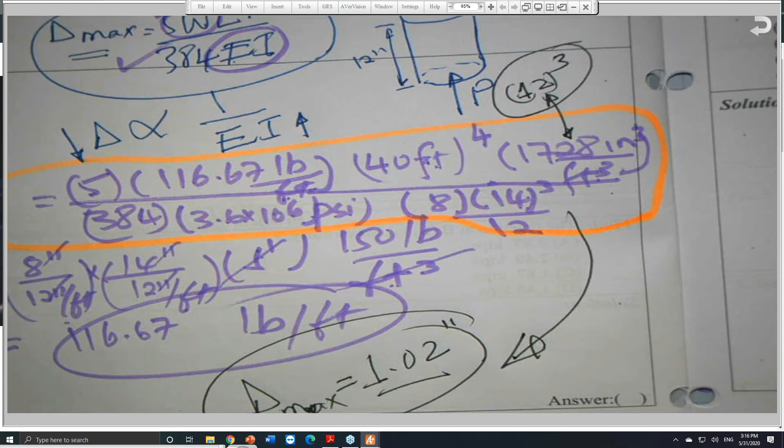So let me put it that way so you can remember this. We need to be aware of that. As you can see here, this beam will deflect as shown - it will concave down like this.

When we build bridges, assume this is a single span bridge, and this is a cross section, for example, of the girders supporting the slab. Do you need your bridge to concave down like this? It will sag down for sure based on the maximum calculation we just got - maximum deflection of about 1.02 inches.

But in reality, we don't build it that way, because we have an issue. If we build the bridge like this, I'd be in big trouble - people would say, who designed this bridge? Oh, this is Mr. Mansour. Who is Mr. Mansour? Dr. Mansour, you made a serious mistake designing the bridge like this. I'm sorry, let me redesign it.

So if you look at the bridge, if you build the girders to be perfectly straight like this, under its own weight - remember, this problem is under its own weight, we did not put trucks on it, we didn't add any load - we said that the beam or girder or bridge will sag like this under its own weight.

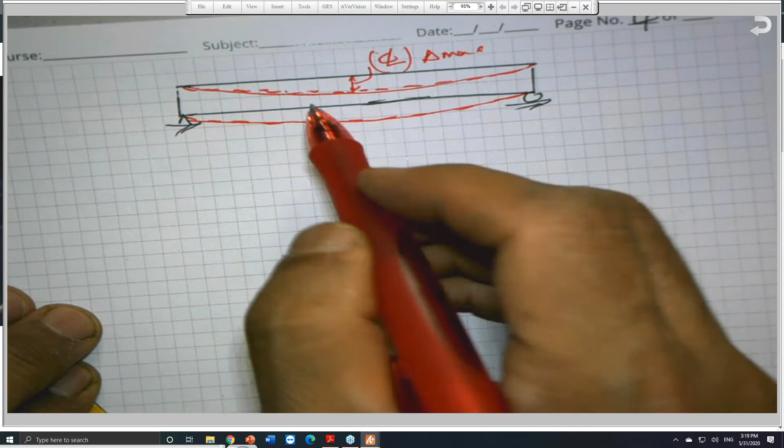If you design the bridge and you allow this deflection to happen, the bridge is still safe. But we do have two issues if you build the bridge like that.

Number one, psychologically, the users of the bridge, when they see the bridge has sagged down like this, they say, oh my God, Daddy, don't go over this bridge, this bridge will collapse. It's still safe, it will not go down. But psychologically, people will be really scared to cross a bridge that is sagging down like this.

This is one problem. The other problem is, it was raining yesterday, and we have a big storm, and the water accumulates here. So the water is an additional load. In addition to the weight of the bridge itself or the girder itself, which is a dead load, we have additional water. So the bridge will even go down more.

And you can calculate how much water will accumulate based on the average rainstorm. Do you remember the formula Q equals CIA? We'll talk about this. This I is the intensity, the rainfall intensity, measured in inches per hour. We can calculate how much water will accumulate here.

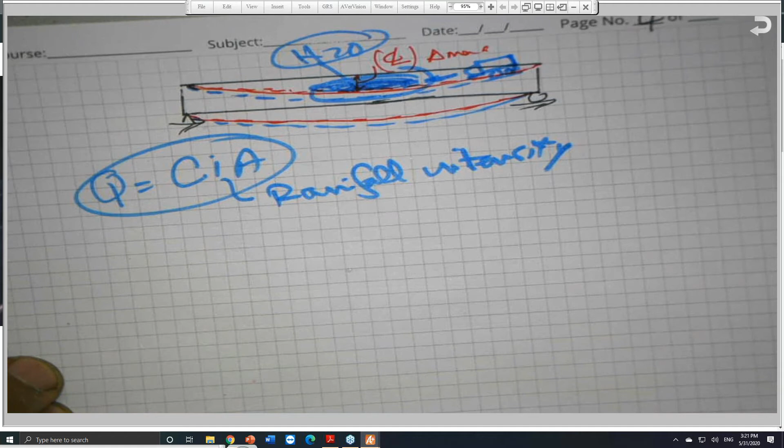This is why when we build bridges, you notice that we build the bridge under its own weight to be like this. We build it with a camber, something called a Camber Diagram, and I'm sure some of you did it. We build the bridge to be concave in the opposite direction. I'm just exaggerating, we build it to be like this.

After we remove all the formwork, the bridge will go down a little bit. It will deflect, because everything, deformable bodies, will deflect down. But it still has some camber built in. It's called the Camber Diagram, and we need to draw the Camber Diagram, and in construction the contractor has to form or shape the forms for the Camber Diagram. I don't know how many of you prepared the Camber Diagram. Okay, it's called the Camber Diagram.

We calculate the deflection at each foot, and we form it such that when the bridge is under its own weight, which causes deflection, it still has some camber. This is number one. If it is raining, the water will be drained, and we collect the water somewhere through the drainage system, and some of you did that. So this is the first benefit I will get, the water will not stand. When Mr. Mansour is driving his Lexus, no water on the bridge, so no hydroplaning.

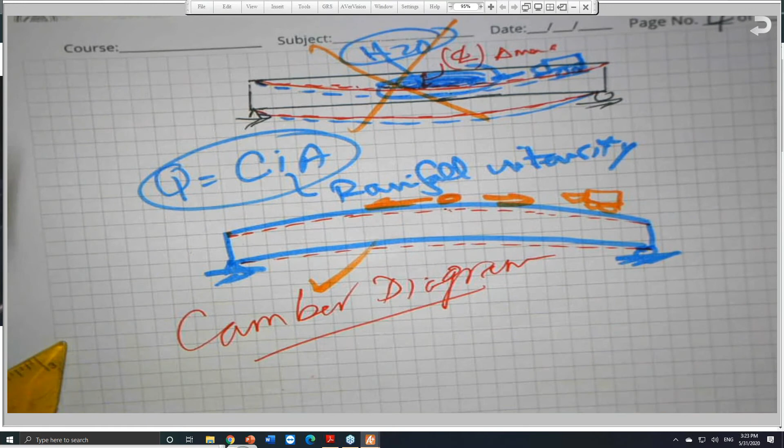So deflection calculations are very, very important. We need to understand the deflection calculation from two perspectives. Number one, we need to understand it from the concept, what are the parameters that will influence the deflection, and the definition, we should know what the deflection is. Number two, what are the parameters that will affect the deflection calculations? Because they might be asking you this question, and it did happen before.

Okay, over these 30 years, I heard all stories, not all stories, most of the stories, let me put it that way. I don't like to say all, because my lawyer always advised me don't use all. They say frequently, or most probably, or most likely. Okay, so I'm trying to use the terms that way. So I heard many stories.

And also we need to know how to do the calculations, like the problem we solve together, that one you are going to review and tell me if the 1.02 inches is the correct number or not. I hope all of you are following this, and when you receive the notes, it will make more sense to you. And as I said, you are very welcome to review it and let me know if there is any disagreement.

We can resolve all our disagreements without going into court, because I hate to go to court. So if you find something wrong with my calculations, don't take me to court, I will correct myself. Okay.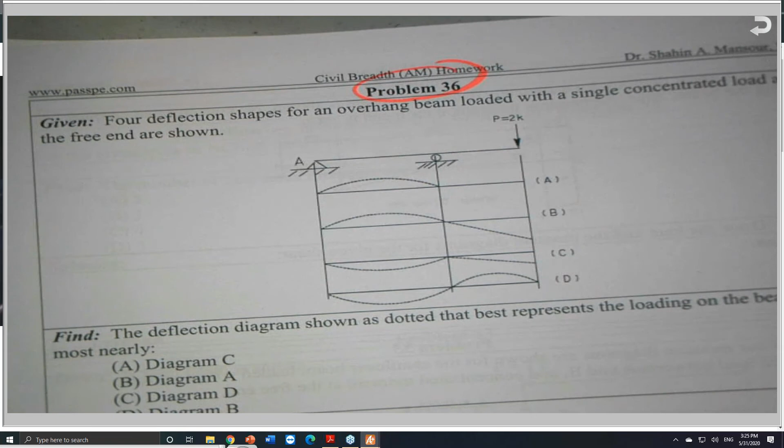A conceptual question about the deflection or deflected shape, 4 deflection shapes for an overhang beam. This beam is called overhang. We need to know all the types of beams also.

I talked about the cantilever beam, this cantilever beam, and the simply supported beam, the one in problem number 16. This is called a simply supported beam, single span.

This is called an overhang beam. Why overhang? Because this is how the beam looks like. So overhang from one end, and there is a concentrated load here.

So he's asking what the deflection diagram looks like, where these deflection diagrams are shown as dotted lines. So which one is representing the deflected shape of the beam, or we call it the elastic curve. In school, if you remember, we call it elastic curve.

And we have an equation for the elastic curve. Do you remember this equation? Which is 1 over rho is equal to m over EI is equal to d2y by dx squared divided by 1 plus dy by dx squared, and this is to the 3/2 power.

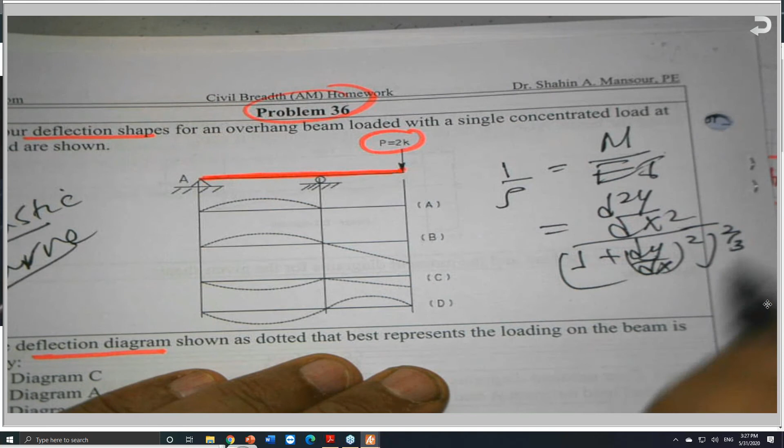We start with this equation, integrate twice, find the constant of integration and all these things. Nobody will ask you to do this. This is from school - this is mechanics of materials.

But we should know the general shape of the elastic curve or the deflected shape of the beam. And the elastic curve will help me do two things. The first one is the deflection - I would like to know how much is the deflection, the magnitude and the direction. The other thing is the steel, where the steel should go.

And I will talk about this immediately after this, but let's just finish this. So, do you think this is the deflected shape of the beam? No.

Do you think this is the deflected shape of the beam? No. Do you think that this is the deflected shape of the beam? No. So, if you push this down, the beam will deflect as shown. It will deflect as shown.

So this is the closest one, or the perfect answer, or the best. Always you're looking for the best answer, not the perfect answer - best answer. Even if the shape is not perfectly as it's supposed to be, non-linear and all these things, still this is the best. So as you push down, you will find that the beam will come down.

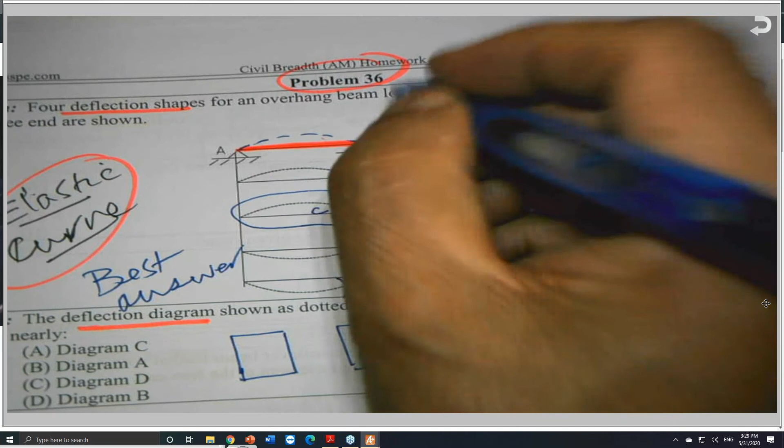So he can give you the same beam and tell you, look, this beam is made of concrete and we have 4 cross sections as shown. The same question, but instead of giving you 4 deflected shapes, he'll tell you that an overhang beam ABC is carrying a concentrated load of 2 kips at the free end at C. And he gave you the spans - this span here is 14 feet and this span here is 12 feet.

The cross section, or 4 cross sections, are shown. Which one is the correct cross section where the reinforcement should be placed? And he will give you cross section A, cross section B, cross section C, and cross section D.

He will tell you, okay, cross section A is like this, cross section B is like this, cross section C is like this, and cross section D is like this. And we can put even the stirrups, the shear reinforcement, but he's talking about the main reinforcement.

Normally they show the main reinforcement, but I'm showing also the shear, but it's not important for you - just in case. If you give the shear reinforcement it does not affect my answer at all, but he's looking for the main reinforcement, these 3 bars here.

So the one at the bottom here, one in the middle here, one at the top here. So which one is the best answer - A or B or C or D?

The same question, but he will not give you the 4 deflected shapes. But if I understand the concept, because the deflected shape or the elastic curve is telling me where is the tension and where is the compression.

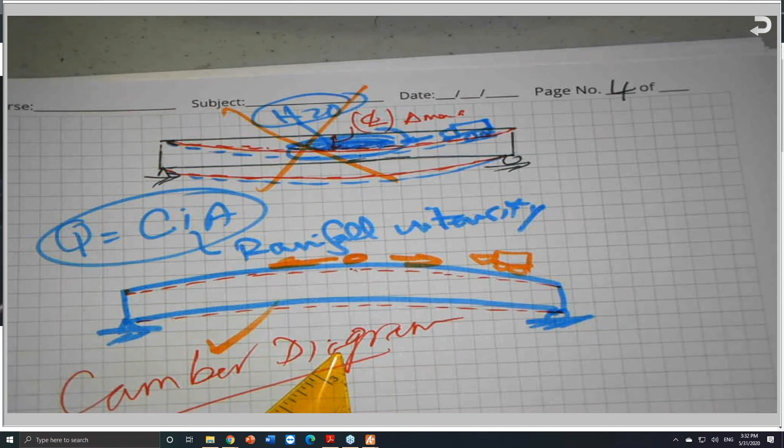And we know the stress strain curve for concrete is like this. If you remember the stress strain curve for concrete, it is like this. And we need to also remember, as we draw the stress strain curve for steel, we need to remember the stress strain curve for concrete, for soils, for wood, and so on. I can talk about all of these.

So the stress strain curve is a relationship between strain and stress, from its name. This is epsilon, which is delta L over L, and this is sigma, which is P over A, but we call it F sub C prime. So F sub C prime is sigma.

The stress strain curve for concrete came from the cylinder, by the way, from the 6 by 12 cylinder, the one I showed you, 6 inches by 12 inches. After we apply the load and collect the data, there is something called a compressometer. We put something around this cylinder. It has a mechanical extensometer to measure deformation.

So it will be like this. It has a little bit of linearity, and after that it will go non-linear until we hit the maximum. It has a little bit of linearity at the beginning, not like steel, and after that it goes non-linear, all the way up to here. And this is F sub C prime, which is the maximum compressive strength.

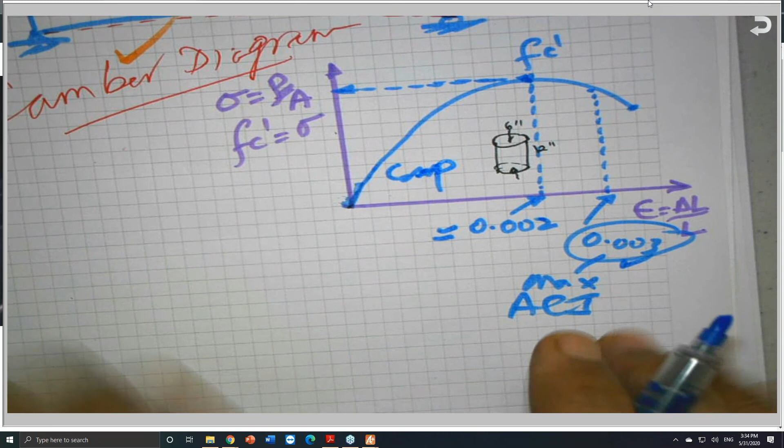But concrete is very weak in tension. In fact, there's no standard tension test, there is no ASTM for it. ASTM is the American Society for Testing and Materials. This is ASTM C39, by the way, C for cementitious, and the number of the test is 39. I taught materials for about 40 or maybe 50 semesters, I have manuals for the students back in Las Cruces and CSU Fresno here.

So if you did the tension test, you will find this stress strain curve under tension. It's very small, about 10% only of F sub C prime, 10 to 12 or sometimes 15% at most. But in design we ignore the 10%. The code does not allow us to consider the tensile capability of concrete. They tell us to ignore it, assuming that the steel will carry the entire tension and the concrete will carry compression.

So going back to this, you will find that, yes, I need to put the rebars along. This is the best, here he puts one bar along the tension and one bar along the compression. This is not the maximum benefit of the rebars. This is the maximum, this is why answer C is the best answer.

Sometimes we use compression steel, where we put steel along the tension and compression, but this is for the long-term deflection and the creep. Do you remember the term creep? Creep is the deformation under constant load over time. But nobody will ask you about that, except I covered it a little bit in the materials section about creep of materials, not creep of concrete. Creep of concrete is not required for you to know because it's beyond the NCEES exam.

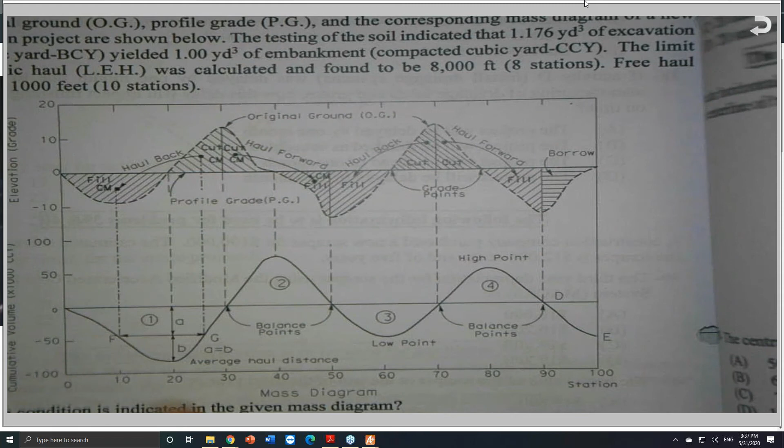So the other problems, the other exams, the fall 2019 exam, it has about 40 problems. How many problems? About 47. Oh my God! So sometimes when I give them the exam, mass diagrams are very, very important, I cover this a lot. Obviously project management, trusses, hydraulics, geotechnical, soil classification. Soil classification is extremely important, and I can spend a lot of time on this, this is the fall 2019 exam.

If you look at this problem here, problem number 19 and 20, there are two systems for soil classification.

As you know, soil classification is tested in both the AM and PM exams, also for geotechnical, construction, and transportation. Expect soil classification in all of these. I don't recall if structures includes this, but I've taught structures and water resources too, though my books for those aren't ready yet. My books for construction and transportation are ready. For the last 15-20 years I've used my own books because I decided to do that - it's a lot of extra work and headache, but I prefer it.

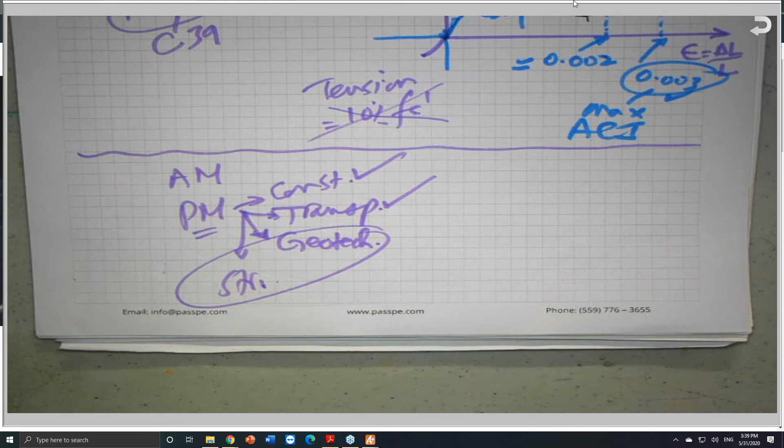So soil classification has two systems: the AASHTO system, or the A system, and the Unified Soil Classification System. These are the two systems we need to know - USCS, Unified Soil Classification System, and AASHTO, which stands for the American Association of State Highway and Transportation Officials.

It's a very common question, as I told you - the USCS, Unified Soil Classification System.

This is called the A system because it has A1 to A8. This is why you'll find, for example in problem number 20, the A number starting with the letter A - A1, A2, A3, A4, and so on until A8. AASHTO started this in 1929, because AASHTO began with roadway design.

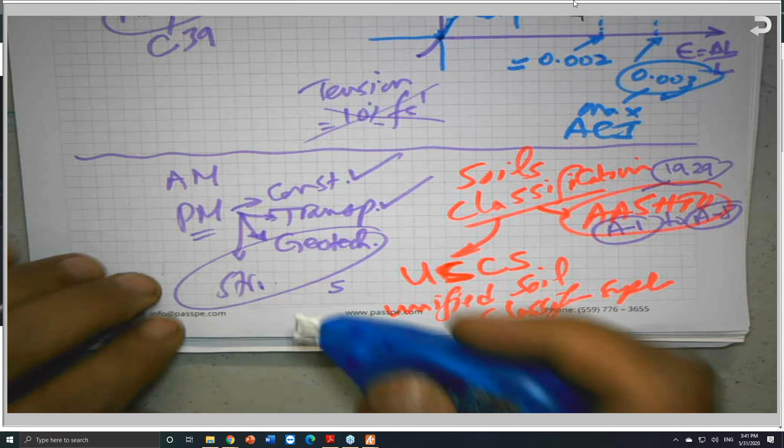The Unified Soil Classification System uses letters - 4 letters first. They use G for gravel, S for sand, C for clay, and M for silt, because S was already used once.

So under the Unified Soil Classification System, you'll find the table we use starts with these letters, except for organic. G for gravel, S for sand, C and M - and obviously the organic is just the O, so if you'd like to add the letter O, that's for organic. So those are the first letters: G for gravel, S for sand, C for clay, M for silt, and O for organic.

There is another letter added to it, if it's a single symbol - we have single and double. Single symbol, like this - this is the group symbol. This is a table of the USCS. They use W for well graded, P for poorly graded, and so on - we can talk about this later.

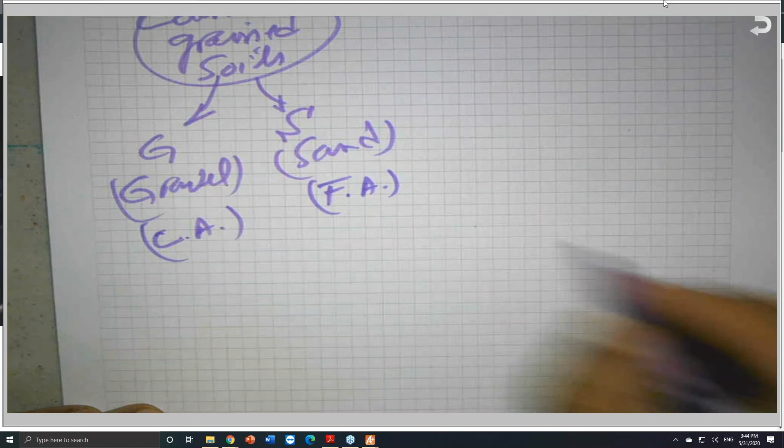For the fine grained soil, we have silt and clay - C for clay and M for silt. The difference, or the barrier, between fine grained and coarse grained is sieve number 200. Anything passing sieve number 200 is fine grained. Anything retained on sieve number 200 is coarse.

If you go further, there is sieve number 4. Anything retained here is coarse, which is gravel. Anything passing sieve number 4 is sand, but should be retained at number 200. So sand is between number 4 and number 200, and silt and clay both pass number 200. When we say sieve number 4, it means it has 4 openings per linear inch, not per square inch - 1, 2, 3, 4 within this one inch. That's what is meant by 4 openings per linear inch.

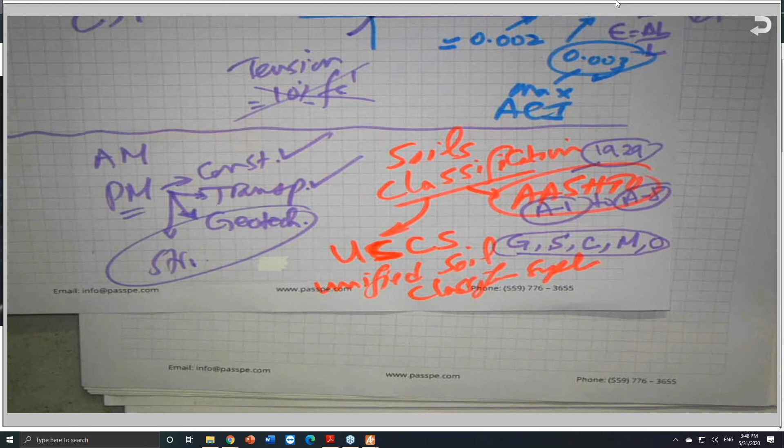So let me ask you a question, and I believe this question is somewhere, if I remember correctly. If I find it, that's good, if not I will phrase the question. Oh yeah, here it is. In the NCEES book, these two systems, question number 130 on the AM. If you don't have the book with you, here it is.

It says the most essential criteria for proper soil classification using the unified soil classification system or the AASHTO soil classification system are... In order to use the unified system or the AASHTO, we need some properties: water content and soil density, Atterberg limits and specific gravity, grain size distribution and water content, or grain size distribution and Atterberg limits.

Four possible answers, three are wrong and one is correct. So what are the requirements? Before we go in depth and talk about how to classify soil based on whatever system you are asked, I should know what the requirements are, because if I don't know the requirements, I don't know what to use. So water content, we use the letter W, which is moisture content.

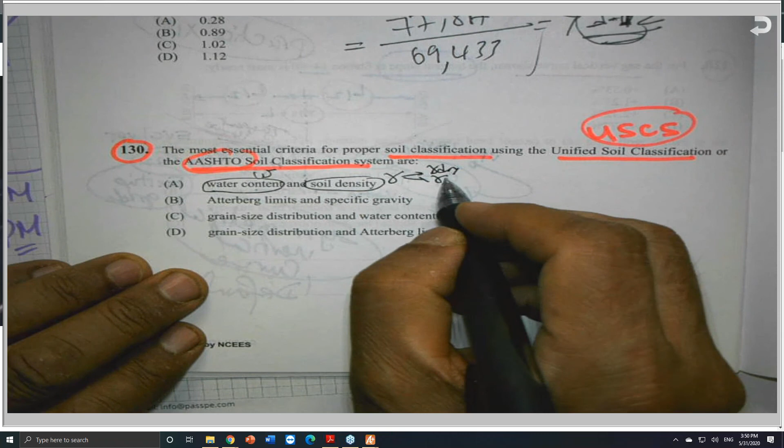Soil density, we use gamma, and gamma has gamma dry, gamma wet, gamma prime, and gamma saturated. We have more than one gamma for soil density, and we can talk about this later on.

Atterberg limits: Professor Atterberg came up with limits, which is the liquid limit and the plastic limit. And the PI, which is the plasticity index, is the difference between them. Specific gravity, we use GS, or sometimes we call it SG.

Grain size distribution is obtained from two methods: either sieve analysis or the hydrometer.

Sieve analysis we use for coarse grained soil, which is the gravel and the sand. The hydrometer we use for fine grained soils, which is the silt and the clay.

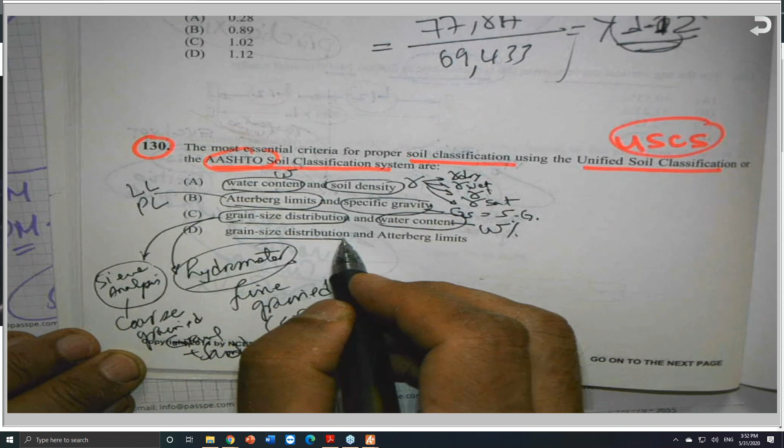The correct answer is D: grain size distribution and the Atterberg limits, which is the liquid limit and the plastic limit, LL and PL. So he gave us a combination of parameters, one answer is the best or correct answer, and the other answers are wrong.

You will find that the answer D is the correct one. We need a grain size distribution and the Atterberg limits. You need to get these two pieces in order to solve it, and this is why I will discuss this problem probably next time when we meet, but you are very welcome to work it on your own.